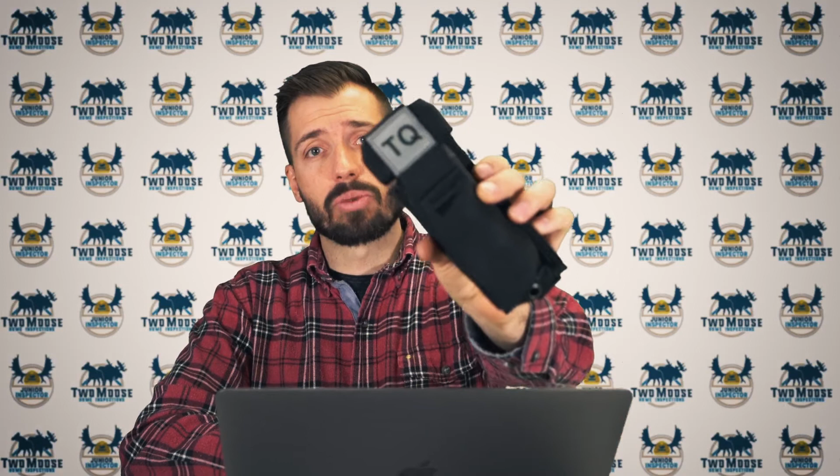Each one of our guys has the ability where on the back of their belt, we have a tourniquet, just like this one right here. This tourniquet is inside of a pouch. You flip this up, and now you're brought over to the actual tourniquet. You can pull that out. Here's a tourniquet that's currently out, and you really want to be careful because there are a lot of knockoffs. Whenever it comes to a tourniquet, you might say, hey, I want to save a couple bucks and not spend $30 per tourniquet, I'm going to spend $10 per tourniquet—make sure you find the right thing.

But basically, if we have an issue, right here we have our tourniquets. They can pull out the tourniquet like this, place it onto their arm. You grab this red tab right here and cinch it down just like that. Once it's cinched down, you might want to do the high and tight approach—a couple inches above where you have the issue. You take this right here, the windlass, and start tightening it up until it cuts off the blood flow, until you don't have a distal pulse or whatever it may be. Take the rest of this on your arm, put it in between these two things. You might have to go around twice—in this case, twice will work.

And then we're going to pull this over. In my pocket, and my other inspectors, we always have ourselves a Sharpie, so I can write the time on here if I'm conscious enough to do so. But that's why the first thing we do is contact 911.

So basically with a tourniquet, that was just in general terms, how to apply a tourniquet to your arm. I need to take this off, and that was only one twist. So that is how you would apply a tourniquet to your arm if you were self-rescuing, if, let's say, as you fell through the attic, you were cutting your arm. So that is one part of the safety, which would be the tourniquet.

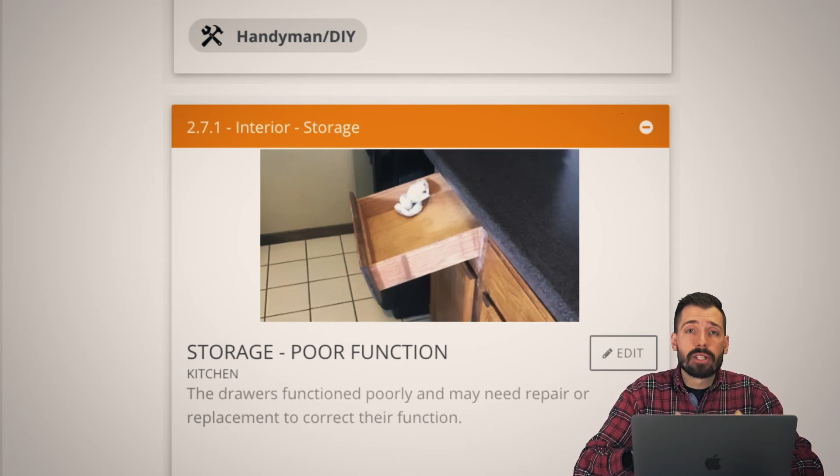Inside of this, there was some moisture on the ceiling, and what it was were moisture stains. But there was no added moisture, nothing in the thermal. The moisture meter didn't detect anything. That's that thing that you can see. It's stabbed into the ceiling.

It uses two prongs, and then it basically figures out the relative moisture between those two prongs. There is some electrical connectivity between a wet surface, so then what that does is it kind of figures out how moist that particular surface is. And in this one, it was bone dry.

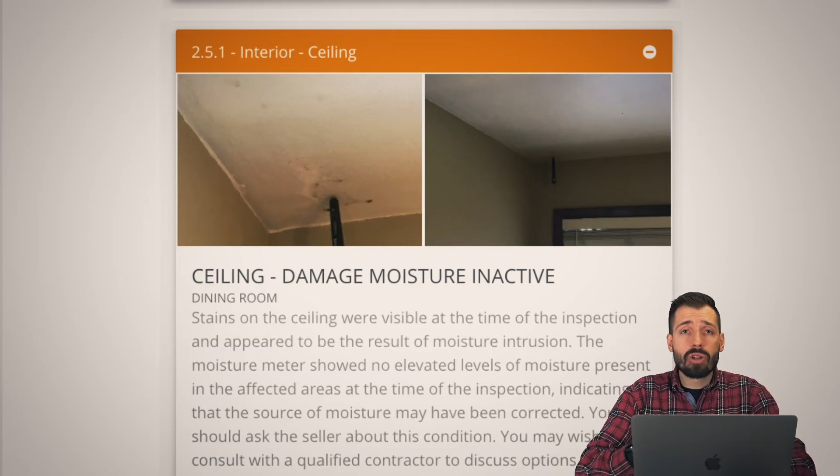So then my recommendation, what you can see at the bottom here, is just to inquire with the seller. Ask the seller, hey, what happened? Why is this way? It could just be as easy as, oh, it was a repair that was fixed a while ago. They put on a new roof. It was an upstairs condo, and so they had a leak. They repaired the leak, no issue.

Okay, well, I still probably have to re-drywall the area, re-texture the area, and repaint the area. So it's still going to cost you some money, and that's why it would be an orange issue as opposed to a blue issue.

So then moving on, it's really easy to put labels on your circuits. And the benefit to this is, if you trip a circuit, you know exactly what you tripped. If you need to turn something off to do an electrical upgrade, or if an electrician comes by to do it, then boom, there they are.

You're paying for these electricians by the hour. If you're paying $150, $200 an hour for a master electrician, and they come in and see 20 of these things, and don't know exactly which circuit to turn off, they have to go around just guessing which circuit, and that takes time. You could lose 20 minutes, half an hour.

Let's just say you're losing $100 just because you didn't label these circuits. And you can do that at home.

Turn on all your lights, turn on all your devices, and one by one, switch off each one of these circuits. Then you can just write the name: north bedroom, south bedroom, living room. Makes it super duper easy.

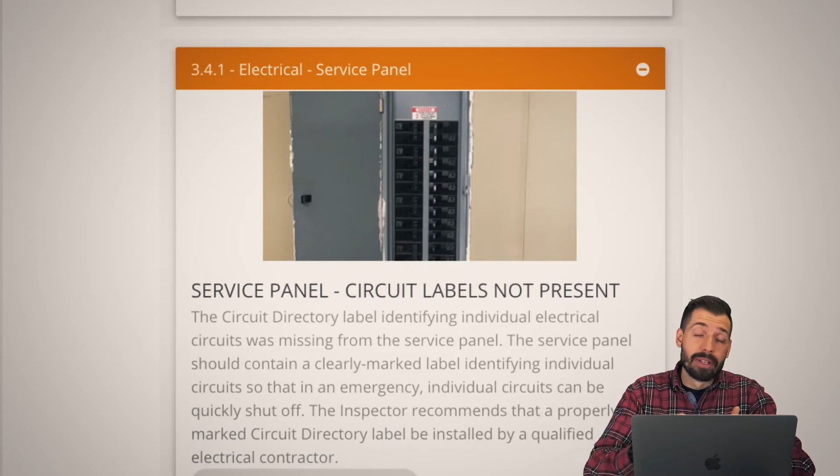All right, this particular shower, definitely end of life. There was so much moisture behind these tiles that they were peeling off of the wall. So these shower tiles were just done. And right around the door was really the worst.

But what it was, was a steam shower. And because of that, the steam had gone through into the back. I don't believe that they had proper waterproofing or anything along those lines. And that has then caused rot or decay behind.

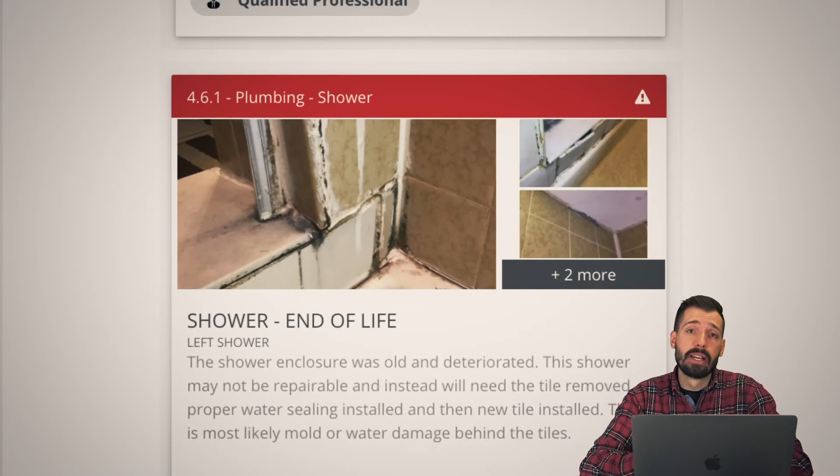I guarantee you the mold issue is more than likely robust. And now those tiles are falling off. Because those tiles are falling off, it's just due for a replacement. It is time for something new.

And so this is the InSinkErator disposal. Obviously blades that spin around really fast, designed to break up a whole bunch of stuff that's in there. Well, if your hand goes down into that, that's going to be a bad time. These baffles prevent splashing, and they also prevent people from putting objects in there that they shouldn't put in there.

So ideally, what I'd love to see is that this baffle just be reinstalled. That way we have a brand new, good to go, super safe sink that doesn't splash anybody, keeps the noise down, and also doesn't let anybody get hurt.

So, rubber supply lines. What happens with rubber supply lines is that where they crimp that end onto the end of the rubber line, a lot of times it might be over or under crimped, or as you move the pipe, we might get a little bit of fraying to that rubber.

Rubber supply lines are always under pressure, which means any leak can become catastrophic. So anytime you see rubber supply lines, right next to it you can see one of the lines is rubber and one is braided stainless steel. So why did they put a braided stainless steel there? Well, probably because the rubber failed.

So just replace both. It's a $20 investment and it takes no time at all. If you have an index finger and a thumb, you can tighten that right on there. It's as simple as putting on a garden hose. I would highly recommend that if you look behind your laundry machine and see that it's not braided stainless steel, just get it replaced. You can probably do it yourself if it's easily accessible.

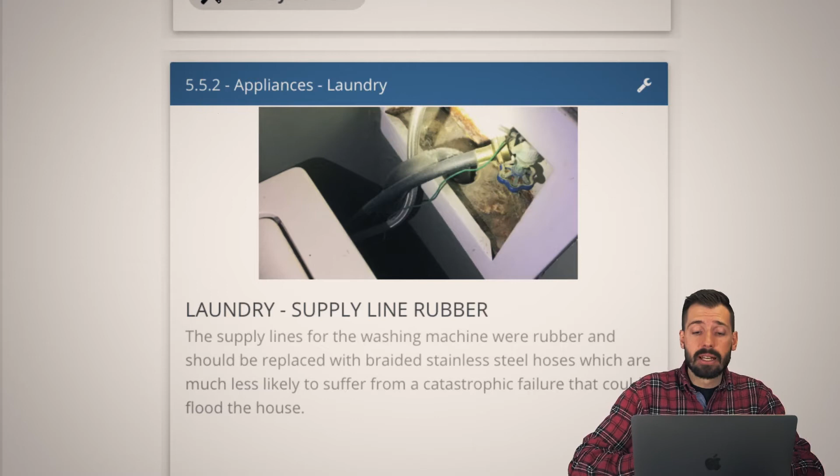If you've ever kicked down a door before, you basically have to kick it in the direction that it swings. That's the weakest part of the door. If you have to go in the opposite direction, you're battling so much support created by the door and the hinges. You'd literally have to break off all the hinges, break off everything around the jamb, and push that door all the way out. You are not getting out of that door.

So in case of a fire, you need to make sure that on the inside, no matter what, you can always unlock that door. If you cannot unlock that door, you're going to have a bad time. And by bad time, I mean death. So this is a $15 fix. Just get it done. It's only $15, but this issue right here could kill you.

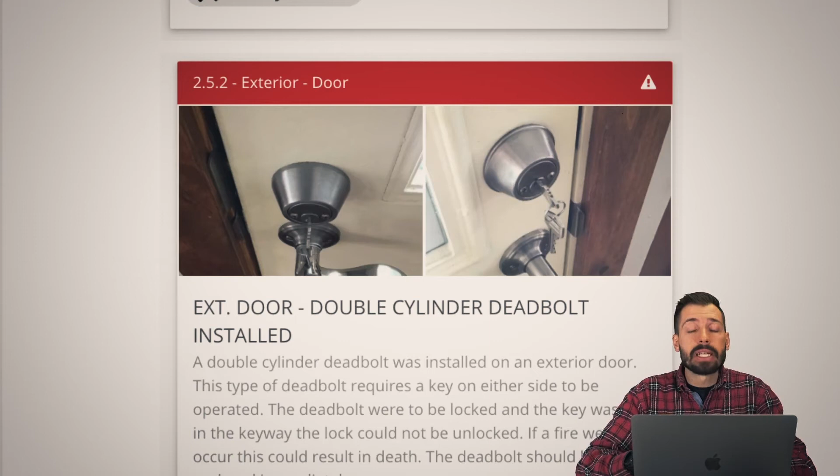So please make sure that inside of a house, you always have a way to get out, and it doesn't require a key to get out.

All right, this particular house, very interesting. So they had a wall and a roof coming to the wall. Normally there's a thing called a cricket, and basically just think of that as a diverter that will divert the water to either side. If that water gets diverted to either side, then we have no issues.

Now this particular house, the thermal imaging just shows that the snow is up against the wall. So we have some really, really cold spots on the wall, but the moisture meter did not find any elevated levels of moisture. So they probably did a great job of waterproofing everything because they knew this would be an issue, so it wouldn't become one.

But still, the recommendation is to install what's referred to as a cricket. It basically takes that slope and tells it to go this way and not touch the wall. That's what we want to see, a cricket like that.

So here are the photos of this particular house. You can really see in that center photo how cold that snow is that's resting right up against that wall. And in the photo to the left, you can see that snow is touching the wall. We just don't want that snow touching the wall. We want it to go somewhere else, because whenever it melts, it's not just going to be snow, it's going to be water.

And if it melts inconsistently, because you can see the cold temperature inside the house, that means it's going to melt, then the cold is going to freeze it, and then it's going to melt again. We're basically making an ice dam up against that wall, and because of that ice dam, now water can come up and underneath the siding and into the house, and we just want to avoid that.

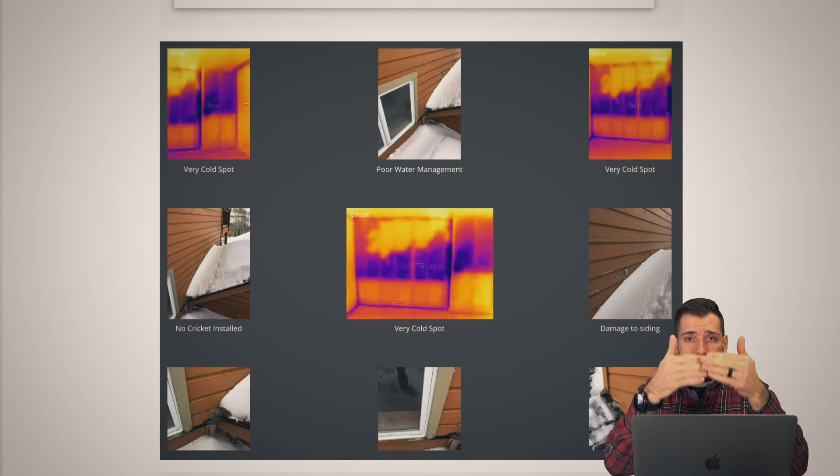So installing a cricket is not a big deal. Any carpenter or roofer could install a cricket that basically takes the water and pushes it to the side instead of letting it hit the wall. So, interior ceiling.

So on this house, I was up inside of that attic, crawl space, whatever, and it was basically just batt insulation. If you're unfamiliar of what batt insulation is, it's basically just insulation, normally fiberglass, that looks like a folded blanket. It might be 16 inches wide by 4 feet long, nice and thick and puffy. Don't roll in it because fiberglass is really itchy.

But it goes into these voids, right into that cavity or that space. And here what you can see, which is what I saw whenever I was in the attic, is that they're just kind of falling out of the voids. They just need to be resecured where they need to be. So what we can see is the cold air from the attic is taking the heat away from the living space, and we don't want that to happen because that reduces energy efficiency.

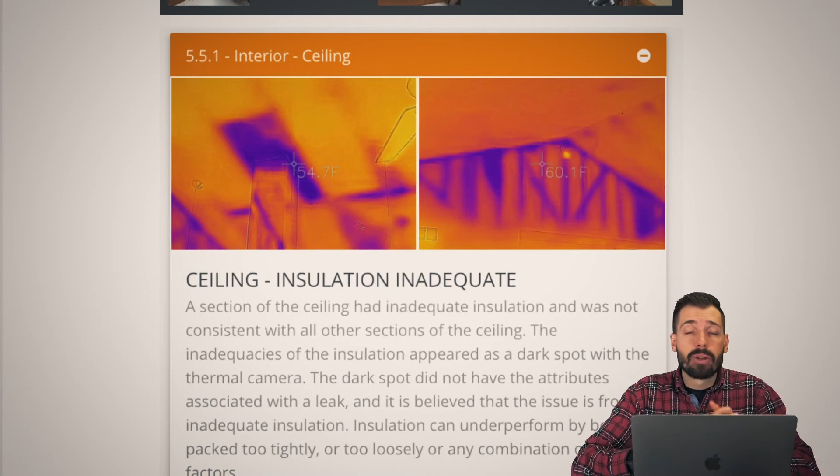So what are we talking here? I don't know, maybe like $50 worth of insulation, and then we can make sure that we are not losing energy efficiency with our heating bill because the heat is not escaping. So really, really easy fix, super accessible attic, super maneuverable attic. We just need to make sure that insulation is put right back where it needs to go.

All right, so in this attic, interesting thing is that we have a sewage vent pipe, and that sewage vent pipe was coming up and it was no longer connected at the top. So now all that sewer gas is going into your attic, and that's less than ideal because one, sewer gases could be flammable, super unlikely, but it could be flammable. And number two, it just smells really, really bad.

And you can see that they had a mechanical union where basically they just put the two different pipes together. So it was a PVC pipe and an ABS pipe, and they just need to tighten it down. So really they just need to loosen up that clamp, put it back in place and tighten it down.

Super easy fix. And then if we take a look at these pictures here, we can see that there were some pipes that were not in use. So in that upper right-hand corner, we have a pipe that's no longer in use. Since it's no longer in use, that means that whenever it rains, instead of the water going down the pipe and then over to the sewer, it's going down the pipe and into the attic. So we just want to put a cap on top of that.

And then on the bottom left-hand side, you can see that there's an orange circle and there's a green circle. The green circle is saying that we are above that 6 inches, so that way if there's snow and other things like that, that vent pipe, that vent stack, can still work just the way it's supposed to.

The other one, a little bit too short. I don't think it's doing what it needs to be doing. I was unable because of the snow to get up there to measure it, but I'm pretty sure it's less than 6 inches. And even if it isn't, with the amount of snow that they get in that area, we definitely want it to be higher than it is. I believe that the one that is super low is the one that needs to be adjusted. So it's real easy - push it up a little bit higher, put an extra 12 inches, mechanical union, and we're done. It's fixed. It's that simple.

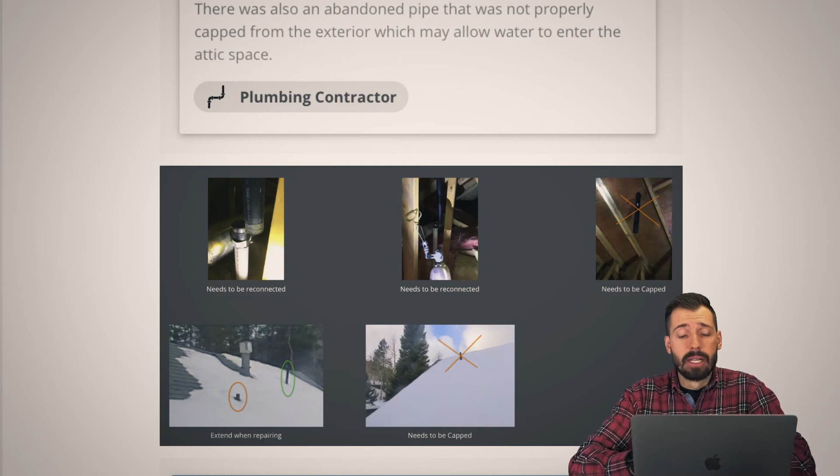So anyway, just something to be aware of, that if you're in your attic, make sure the pipes have a place that they're going. Every pipe should get to the exterior.

So this house here, this was actually the same house with the lack of a cricket. And what you can see is that because of that, we got water that was coming down into the garage. And because it was coming down into the garage, you can see that white stuff, which is efflorescence, which is basically the water comes through the wall, and whenever it evaporates and dries, it leaves just a little bit of mineral deposits right there.

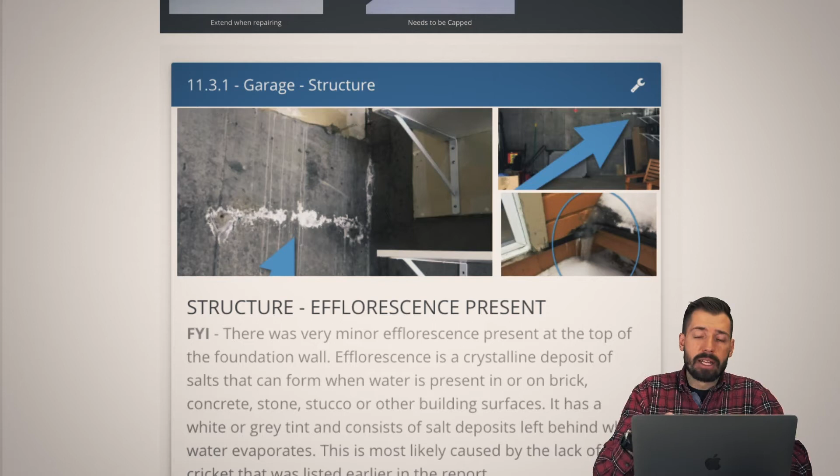And so this was not severe. This was not a big deal. Really, I didn't see any issues with cracking, I didn't see any issues with anything. And if they fix that cricket, then that will also fix that type of an issue, because we also need to do just water movement, drainage, whatever. But I think all the water was kind of going there, so during spring runoff, that makes it a little bit more difficult.

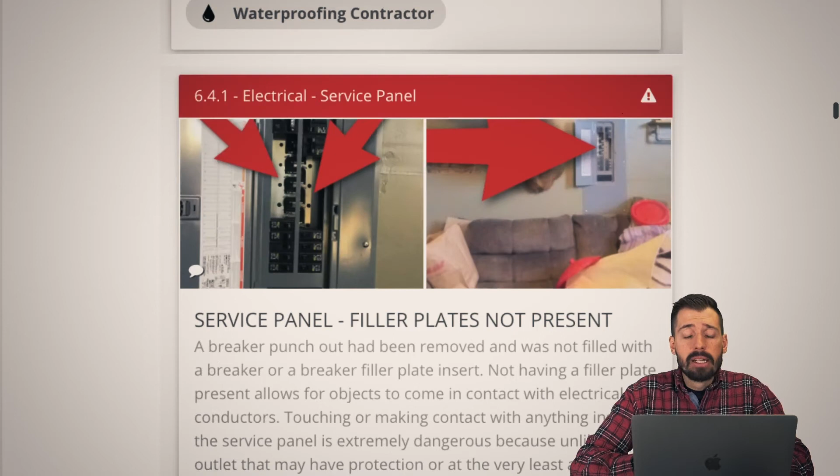But no, it's super minor, just something to be aware of, but really not a big deal. All right, so this is a good way to kill people. Let's just talk about it.

So the filler plates are not present. What does that mean? Inside of there, they punched out every single hole, but they didn't fill it with a circuit breaker for every single hole that was there. So we put in these filler plates to basically prevent somebody from putting their hand into the circuit panel and being electrocuted. Now, both of these, if you look where the two arrows are pointing down, those arrows are pointing to pieces of metal, and one side is 120 volts, the other side is 120 volts.

And because of the service panel being attached to a 200 amp breaker, that's 200 amps. If you have 0.7 amps going across your heart, that's enough to kill you. So 200 amps, I don't know how many times you can die - I think only once, but this thing will kill you. And the scary thing is that it was right next to a couch and the panel was left open, no lock on it, no nothing.

And so if a kid were on the couch and they put their hand in there, it would be game over. And so we just really want to make sure - how much are you going to invest? Each filler plate's like $1.50, right? And we need to probably fill up 10 of those. So for $10, you can save a life. That is a good return on investment. So just something to be mindful of.

Also, same place, all the receptacles, all the switches, they all did not have a cover plate. Each cover plate, even for this, what's referred to as a 4-gang box because there are 4 switches in it - that right there might be a $2 cover. Every other cover, anywhere from 50 cents to $1.25. But if you put that cover on, and anybody can put that cover on, for this particular switch it's less than $2, and it's probably less than 2 minutes of your time.

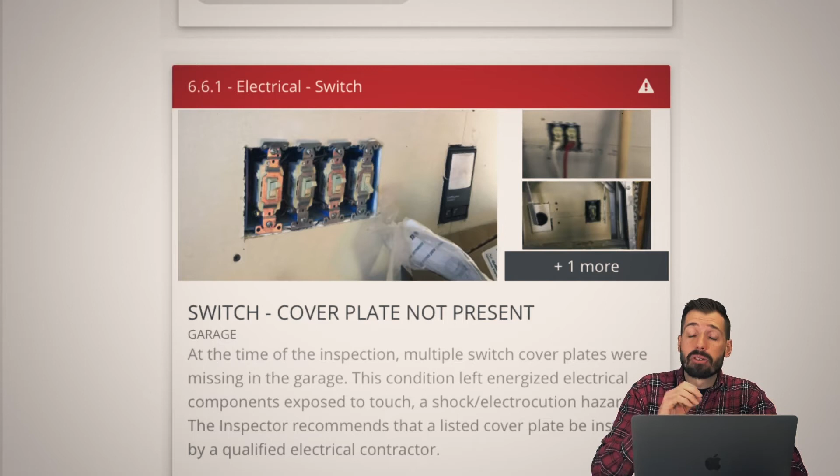Because if somebody in the dark touches that switch but they actually touch on the side and they touch one of those metallic things, you're going to get shocked. Hopefully the hand moves away and you don't die, but you're still going to get shocked and it's going to hurt like a son of a gun. So something to be mindful of.

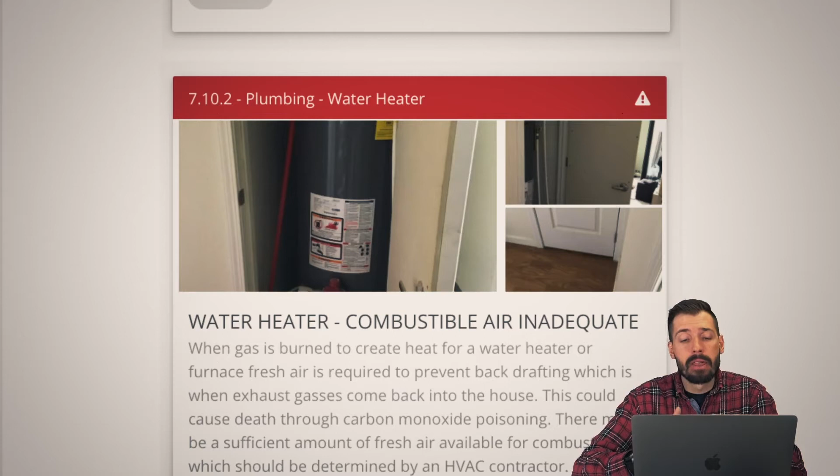All right, in this house, the combustible air was inadequate. So basically what happened is, I believe, and I don't know this for sure, but I believe that originally the water heater was an electric water heater, and I think it got changed over to a gas water heater. So whenever you have a gas water heater, you need to have air coming in.

Now what I will show you here is this is referred to as the fire triangle. So you have your fire triangle - heat, oxygen, and fuel. In order for there to be a fire, there has to be heat, that's going to be the igniter sparking. There has to be fuel, that's going to be the natural gas. And there has to be oxygen.

So in a room like this, where it's completely shut, completely closed, and there can be no air coming in or out, where's that oxygen going to come from? Because we're already going to have this combustion, now we need oxygen - it's going to suck that oxygen from somewhere. And it's very, very possible that it might suck the oxygen from the flue, from the roof all the way down the flue, and it might suck in that oxygen as combustible air.

And if it does that, okay, fine. But then where does the byproduct go? Where is the carbon monoxide, which is a deadly, deadly, odorless gas? And there weren't any carbon monoxide detectors anywhere near this, so there's really no idea if we're safe or not. Now whenever we do an inspection, we always have a carbon monoxide detector on our person that is actively checking to 1 part per million accuracy of how much carbon monoxide there is in a home.

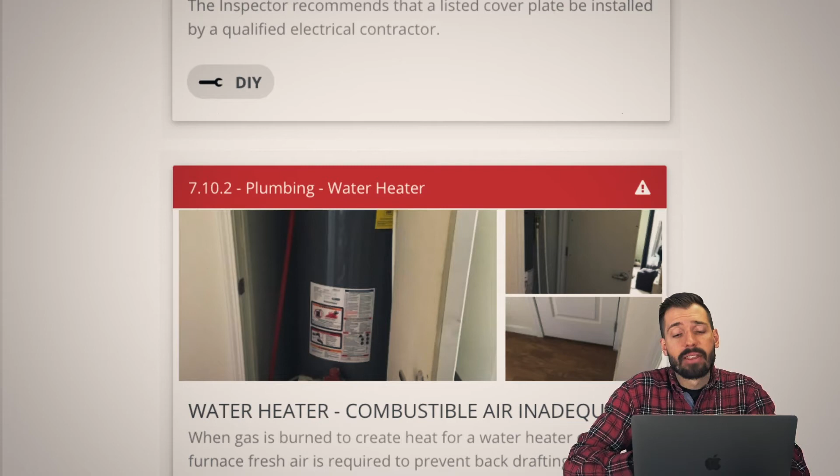And this home, thankfully, had zero. But if conditions were correct, is it possible that oxygen could come down that flue pipe and all that carbon monoxide gas is going to go into the house? That is referred to as a backdraft. That is very dangerous.

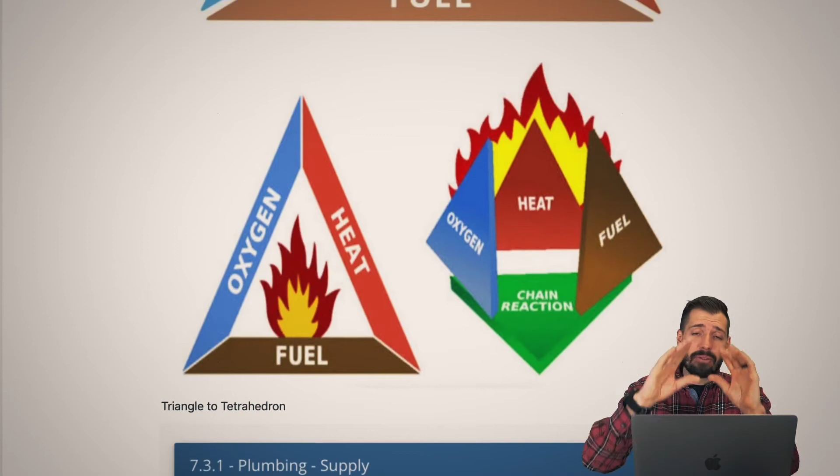Now, whenever I talk about the fire triangle, I also have to talk about the tetrahedron. So basically now, instead of a fire triangle, and I can't do it as easily, but now there's a fire tetrahedron.

So basically this here is a 3D object as opposed to a 2D object. I like to just jokingly call it the fire polygon.

But honestly, what this is talking about is a chain reaction. So the chain reaction sometimes starts and doesn't stop. A candle will continue to burn its fuel source until there is no longer a fuel source available, and then the candle will expire. But then there are other things where the chain reaction is not strong enough to continue, and you have to constantly be reapplying additional input to make it stay lit. That might be if you're starting a fire, and you apply the heat, but you didn't apply enough heat, and you have to continue because you have wet wood, and the wetness of the wood is stopping that chain reaction. That right there is the explanation of the chain reaction.

And sometimes that chain reaction can be a chemical chain reaction, which means that if you have oil-based rags that you've thrown into a container, there can be a chemical reaction that creates that heat, creates everything, and that gives it enough that it can then ignite and you can have a fire. So anyway, since we're going to talk about the fire triangle, I guess I may as well, for once and only time, talk about the fire tetrahedron and explain to you why that is something that exists.

Here's something that I just don't understand. Why in the high Rockies, in a high alpine environment, do we have vented crawl spaces? Yes, vented crawl spaces allow us to have lower levels of radon. That's amazing. However, vented crawl spaces venting 9 months of winter into the basement of your house, whenever you have inadequate insulation and fully exposed water lines, means it's a recipe for disaster. If you have an unconditioned crawl space and you're putting in freezing cold exterior air, your pipes are going to freeze. I do not like vents in a high alpine environment.

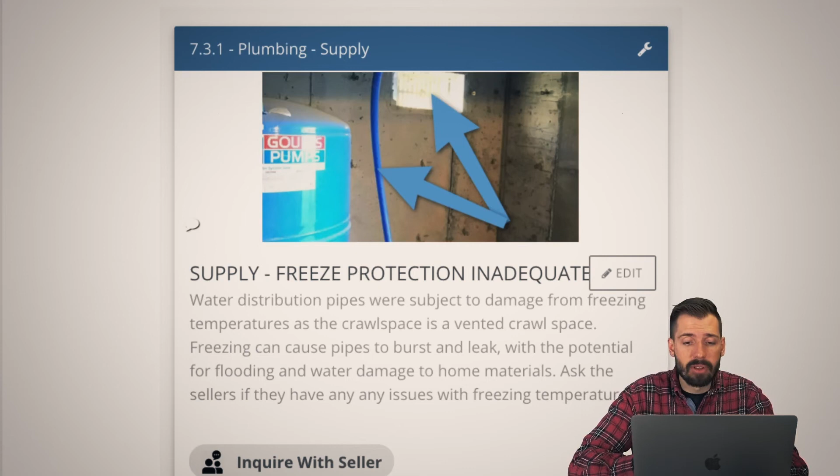All right, this is just me being nitpicky. So you have a round object that has a gap behind it, and the water is going to go down, and then it's going to go back behind your wall, and it's going to cause rot, mold, and other things like that. Take caulking and just go all the way around. Now, you aren't going to do a full circle—you're only going to go around a portion of it, down to this side, and that's it. The reason we leave the bottom open is that if water does get in there, we want the water to be able to exit somehow. We don't want to trap it back there, but we also don't want to give it a free pass to go in behind the wall.

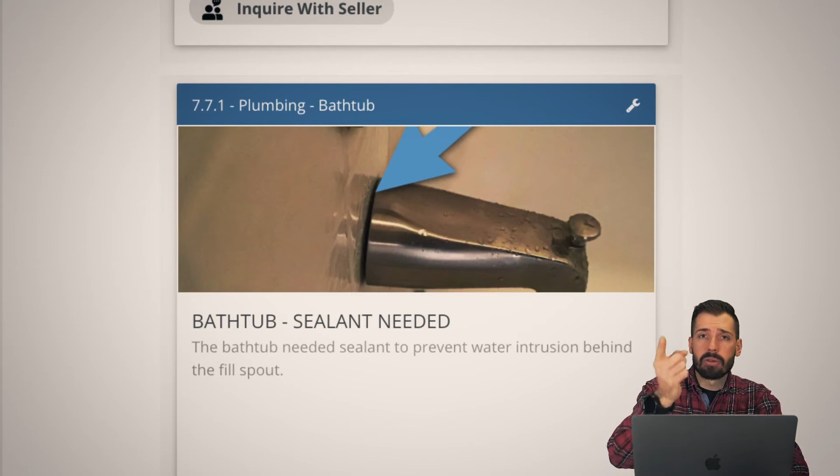So just a little bit of caulking, $1.50 for a little tube. You don't have to have a caulk gun. They have these small tubes that look like toothpaste tubes, and you can just put that on with your finger, wipe your finger off, or if you have a glove, do that. Or if you have a proper applicator, you can do that. Easy peasy.

All right, this one is a trigger for me. We all talk about some of our triggers—this is a trigger. So we have just exhausted all of this radon gas. We've done an amazing job of exhausting all of this radon gas. It is going out of our house, and we're pushing it directly into the soffit vents.

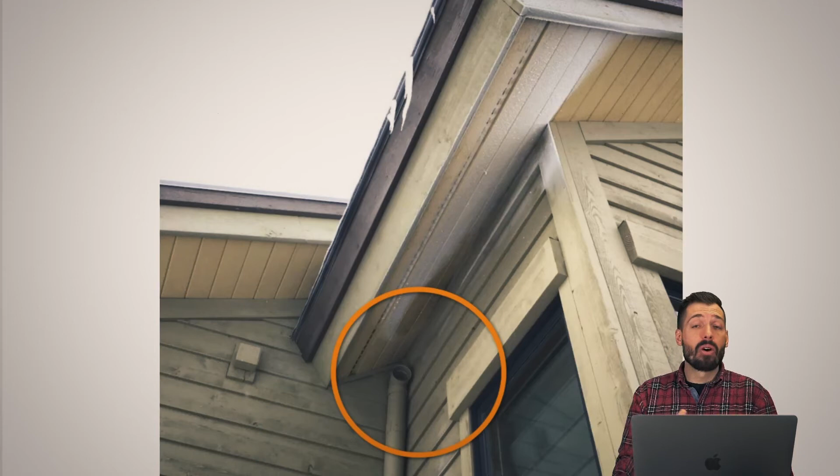The soffit vents are the vents that bring air into the attic. Most houses have some kind of air movement between the attic space and the living space, so we're now introducing highly concentrated levels of radon, which is radioactive gas, into your attic space.

What are you doing? Take that pipe up, over, and out and get it away from that window. Get it away from that soffit vent. Just get the radon up, out, and away. There is no reason to reintroduce it into the house.

This is probably one of the best examples because you can see the frost buildup showing the temperature difference, and you can see the humidity being brought up out of the ground by this radon mitigation system. There's no clearer way to show how much radon is going directly into those soffit vents. This is a perfect picture to explain that.

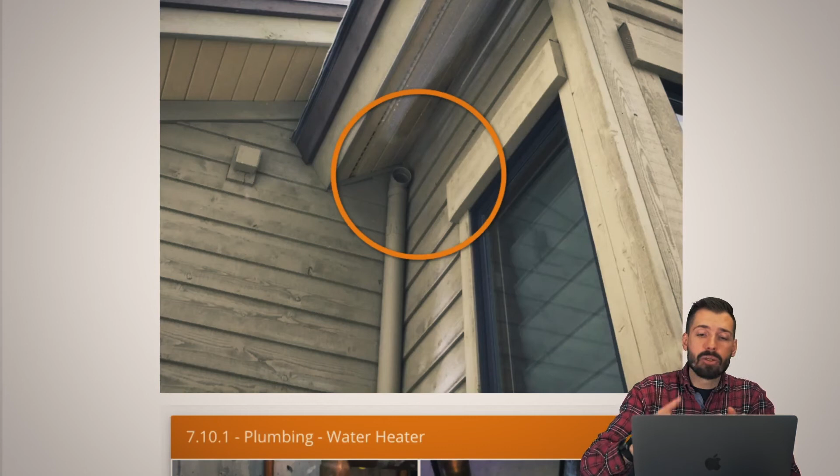So anyway, just $20, and paint it to make it look nice. You can do those things. Just get the radon out. That's all I have to say about that.

All right, water and corrosion. The water heater had some corrosion on it. If it has corrosion, you definitely want to get that fixed. If we have a leak, keep in mind that whenever you're connected to a water supply, that supply is limitless. It will continue giving you water until forever, meaning it'll continue to flood your house until forever.

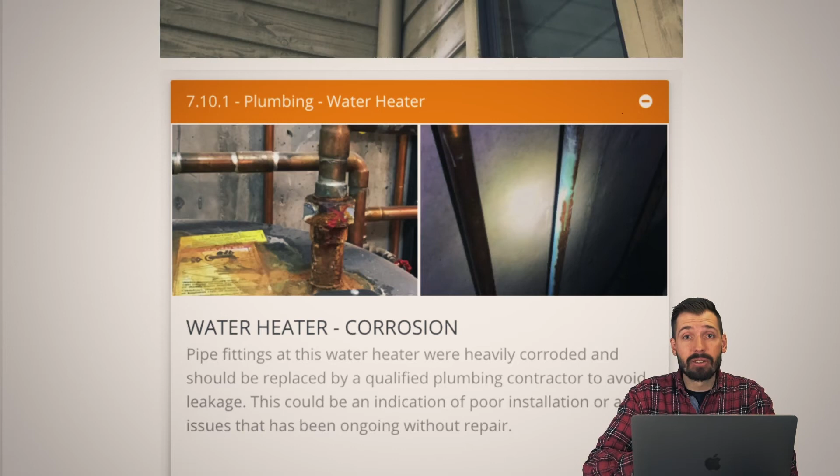So you want to make sure that your water heater is definitely not full of corrosion, not full of rust, and that all your pipes are good, because if not, you're going to run into an issue, which I think we're going to see a little bit later.

All right, this one here. If you have kids, or know kids, and you also happen to have a garage door, this is your responsibility. Go grab a 2x4, put it underneath the door, and close the garage door. If the garage door does not hit it and then come right back up, that means you have a problem. This particular door was a custom, super duper heavy wooden door.

This door by itself, even with the springs helping bring it back up, is like a 500-pound door. Now imagine a small child having 500 pounds across their chest. Even with these springs reducing that weight a little, we might only be talking 100 pounds. Take a 6-year-old, put 100 pounds on their chest, and you know what happens.

It is your responsibility as a homeowner to reduce your liability and make sure people are safe, to make sure things are good. Do you know what the fix to this is? Do you know how serious of an issue this is? This is a red issue. This is a big deal. It's a deal breaker. No.

What it is, is a knob that you twist. You literally just twist this knob. It's inside where you change the light, and it is the tension for bringing the door back down. You just turn it to go lighter, like you don't want as much pressure, then put that 2x4 underneath there, and if it hits it and bounces right back up and the door fully retracts to where it was, then you're golden. You're perfect. All it took was popping up that cover and giving a little twist, maybe a quarter of a twist. If you can twist a knob a quarter of the way, this is the resolution.

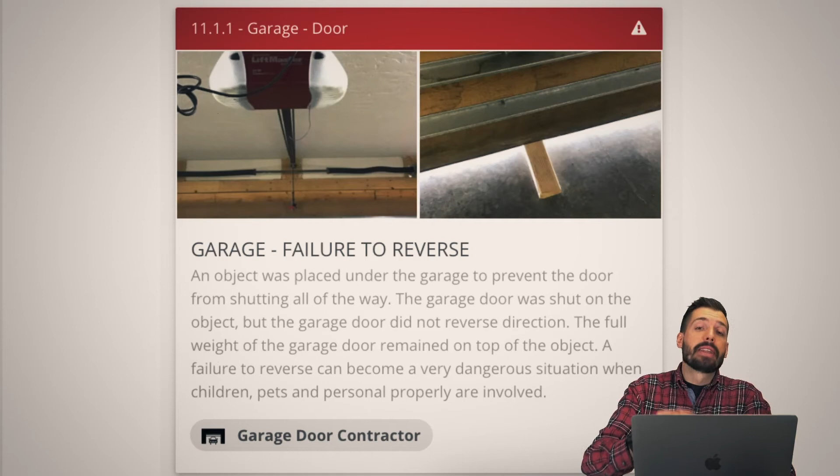It's so silly because there are so many issues in a house that could potentially kill somebody that honestly take less than 20 seconds worth of effort to make completely safe. So that's my soapbox, getting off of it. I hope that's the only soapbox for today, but we'll see.

In this house, there was a radiant zone where, in that bottom right-hand picture, you can see that half of the floor is dark blue and purple and the other half is yellow. I can't tell if that radiant zone was that way per manufacturing, like they decided they don't need to heat this part of the floor because the rest of the house will keep it warm, or if there was a failure and a pipe was closed. It didn't look like a pipe was closed when I looked at the system. Everything looked open and operating correctly, so it looked to me like this was probably the way it was designed.

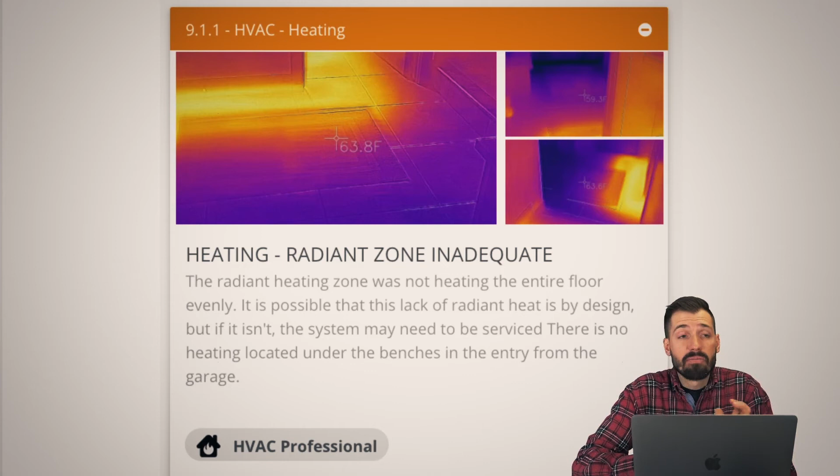Is it the best design? No, not necessarily. Is it wrong? No, not necessarily. But it's one of those things our thermal camera can pick up, and then you can just have an HVAC guy come take a look at it. You can inquire with the seller if they're the original builder of the house and have been there the entire life - hey, what's going on here?

So next thing, exterior walls. On these houses, whenever you have two pieces of siding that come together, there's normally a piece of flashing right there on that seam because we don't want rain coming into that seam. We actually want rain to hit and then come down away from everything.

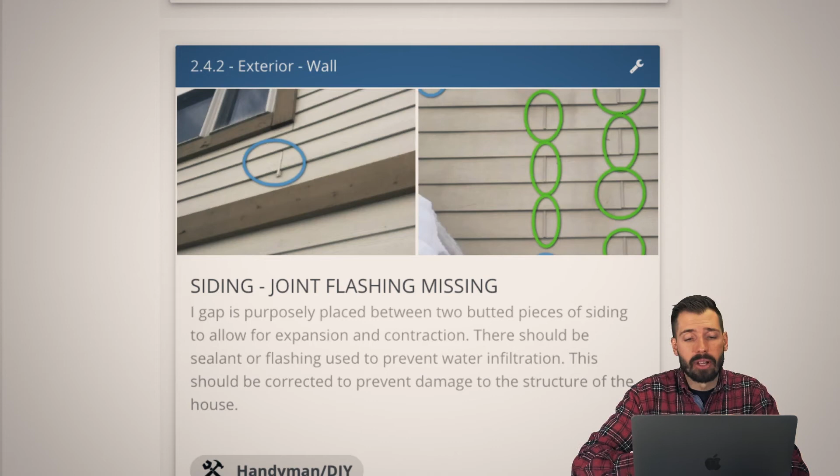And so they put these little spacers in there. On this house, some of the spacers were missing - you can see the picture with the green, all of these spacers are there, and then there's a couple in the blue circles that aren't there. You can just get these spacers for super cheap, slide them up onto there. If you want to put a little bit of caulking just on the edge, or glue or adhesive, they won't fall out. It'll be perfect. Super easy fix if you're worried about it. If you're not worried about it, don't worry about it.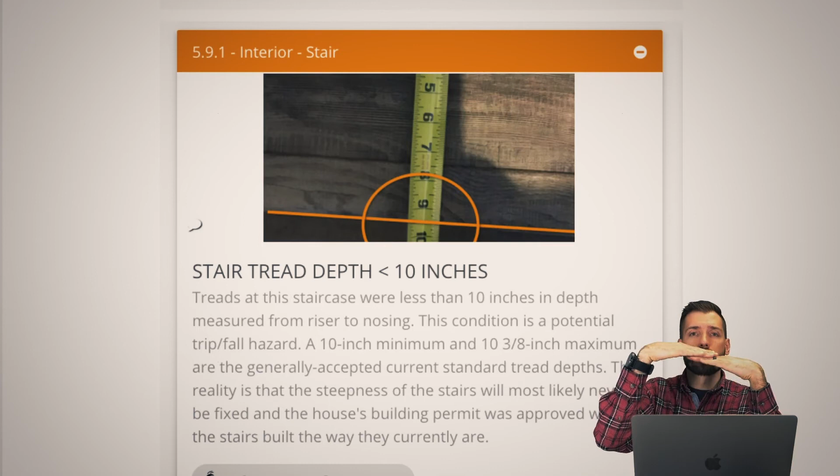So next thing, stair tread depth needs to be no less than 10 inches. This was at 9.5. So what happens here is that what you're stepping on is actually shorter. Whenever you're coming down the stairs, there's the likelihood that your heel could potentially, because you're used to other stairs, not be quite level. Your foot will then fall into a little bit of plantar flexion - the foot will just go like this, and then you will start to slide down the stairs.

So is there a fix to this? No. Nobody is going to completely demolish that stair set and put it in the correct way. This is just one of those things that just is. I think even in the last one we talked about stairs, how sometimes they just are, and there's not much that can be done about it.

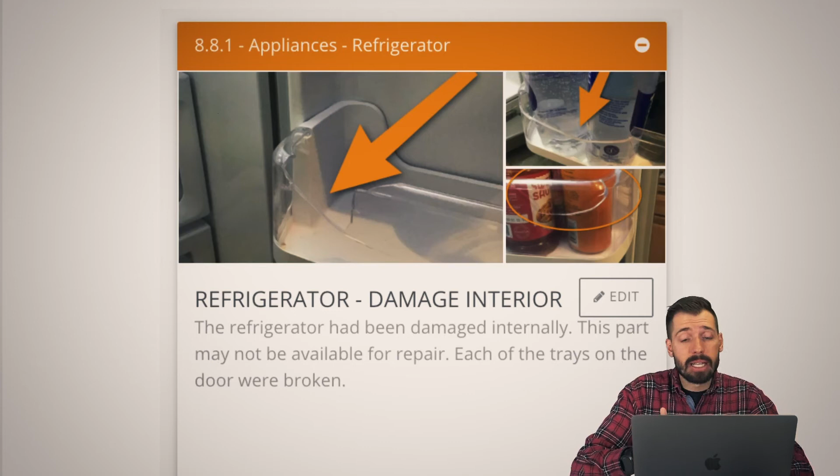All right, so in this refrigerator, I think every single door accessory tray on the door was cracked, broken, or damaged in some way. This is reported upon because it's going to cost you some money and it might take time, and who knows if the manufacturer still has those replacement parts. Just one of those things to be mindful of.

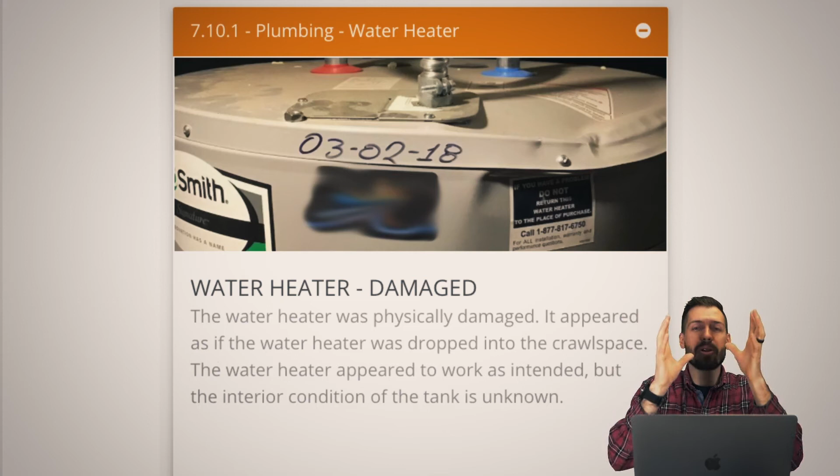Now I'm off the screen - if I have my hands all the way up here, and I'm going to take a 200-pound water heater and gently and slowly bring it right down to here... you're joking yourself, it's never going to happen. They had not enough guys to do the job that needed done. Maybe there was only one guy doing it instead of two, but there really should have been 3, maybe even 4 to get this thing down there safely, or have some type of pulley system to get it down the right way.

Long story short, it appears as if they dropped it. And not only did they drop it, but instead of getting a brand new one, since they're the ones that damaged it, they just installed it anyway - nah, it'll buff out, right? So, whenever I see things like this, I would personally contact the person that installed it and get them to put in a new one. Is anything damaged? There's no way to know. Well, it's not leaking - yeah, not leaking now, but maybe it's going to leak in a year because we have damaged that sidewall, we've bent it. Maybe this is now a place for corrosion.

Did we dislodge the sacrificial rod that's inside of it? Are we now going to have more rust and other issues like that? The thing is, we don't know the condition of it because it was dropped. It needs to be replaced. Long story short, that's what needs to happen. And it needs to be replaced by the people that dropped it, not even necessarily by the homeowner. It needs to be replaced by the people that installed it. It's just silly.

I do have another trigger, it turns out. If you want to talk about triggers, here's a trigger. I came back and they specifically stated, we fixed this repair, repairs were fixed. So I came back, I put my moisture meter in the exact same two holes that I had it in before. Boom, still moisture. All right, well, whatever. So then I take my thermal camera and I can see clearly still a dark spot in the wall, still evaporating moisture. We call up the plumber.

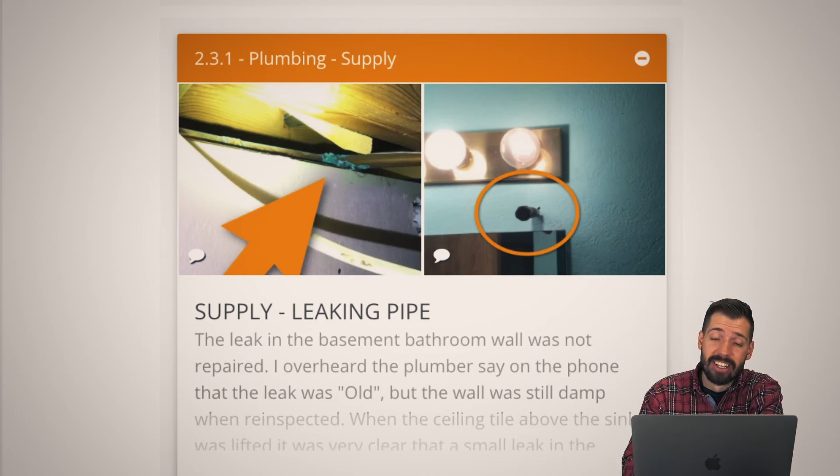All right, hold on. Good morning. All right.

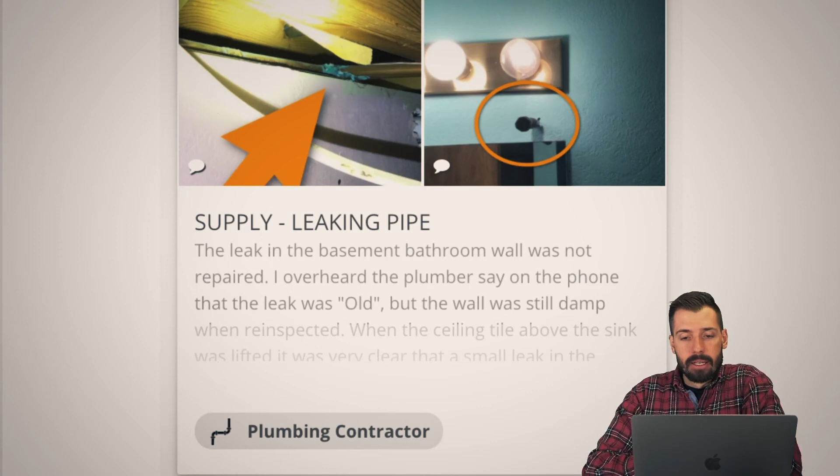Now, there are things in this house, such as a crack going across the ceiling. There were things in the house, such as doors that wouldn't latch or wouldn't open or close properly, which tells me, yeah, there was definitely some sort of settlement. But then you go into the crawl space, and there have been repairs. And if you take a look at these repairs right here, it was substantial. I think what happened was that we had water coming into that crawl space, saturating the soil, and the house was either sinking or the foundation wall was moving.

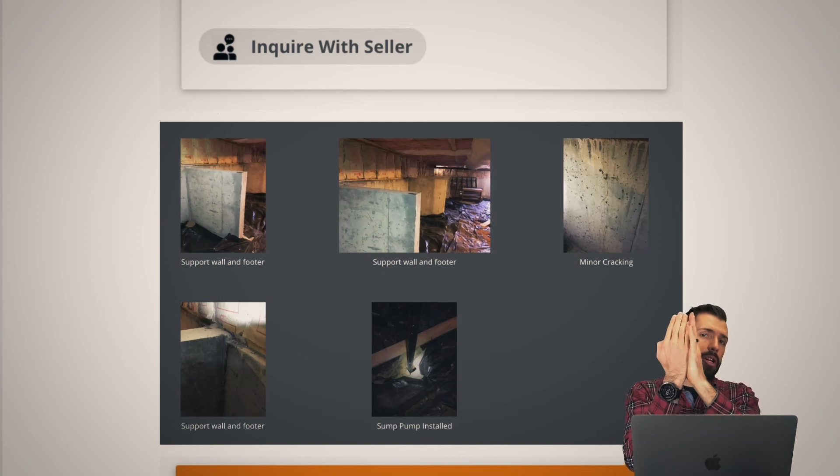So they put in these large walls to basically stop that movement. These walls are now holding it back. The walls are also on a little bit more of a footer, so maybe we were sinking and so we've dispersed the weight a little bit more. I don't 100% know. And then they installed sump pumps, two of them, to suck water out of the ground and eject it elsewhere.

With all of that being said, I definitely have my concerns because they did not want to disclose the structural engineer's report. They did not want to disclose who did the work. They did not want to disclose any of that kind of stuff. And so to me, that is a red flag, because anybody can pour concrete and some people can make it look good. But what I want to know is who gave it the final blessing? Who said this is great?

Because what I would love to have seen is that foundation wall supported. I would love to have seen, which you would not know, but I would love to have had them jack up that side of the house, maybe a quarter of an inch, maybe half an inch, and then redo that pony wall - basically, we'll just call it that cripple, that support, whatever you want to call it.

And then the doors would open and close properly. Things would do what they're supposed to do. The doors did not open and close properly.

And the fact that they didn't want to give us any kind of information about the repair, that's just a red flag. I don't like red flags. Not a big fan. Red, white, and blue, love it. Red flags by themselves, not a fan.

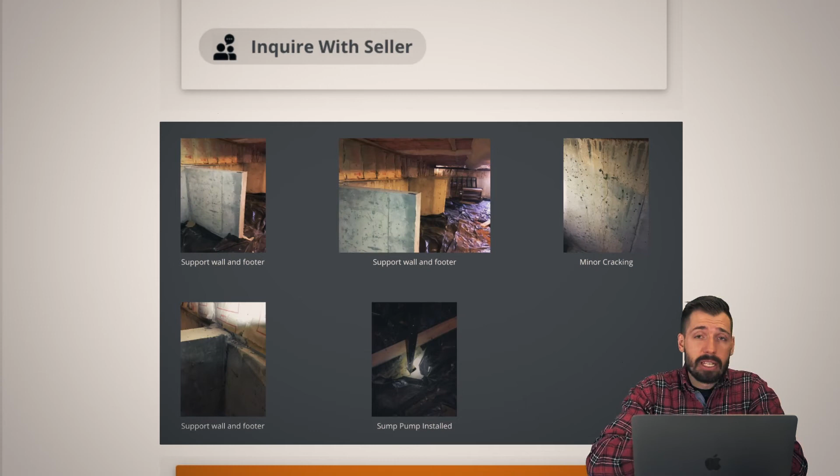Now, depending, there's a lot of rules and regulations about when you can bond the neutral and the ground together, which is going to be at the very first service disconnect. But let me just tell you, at this particular house, we had a meter base panel. Then we had an exterior panel. Then we had a garage panel, and we had an inside the house panel. There's basically like 4 disconnect points, and now we're bonding neutrals and grounds.

And what you have is that now, because we have crossed the neutral and the ground, 2 things have happened. One is the grounds may no longer be true grounds. They might actually be powered. So whenever you turn off a breaker, there's a possibility that electricity could still be going back to those grounds, or neutrals, or vice versa. And so now that everything's kind of intermingled, I don't really know what's turned off and what's not turned off.

So that's step 1. But the real issue, step number 2, is that because that has happened, now electricity, because I have my 120 volt hot legs, those go back as 240 volts. Now what has happened is that in order to complete the circuit, normally it'd be a red, a black, and a white, and that goes back, and the ground's just there just in case. Well, now the electricity is halfway going back on the ground and halfway going back on the white.

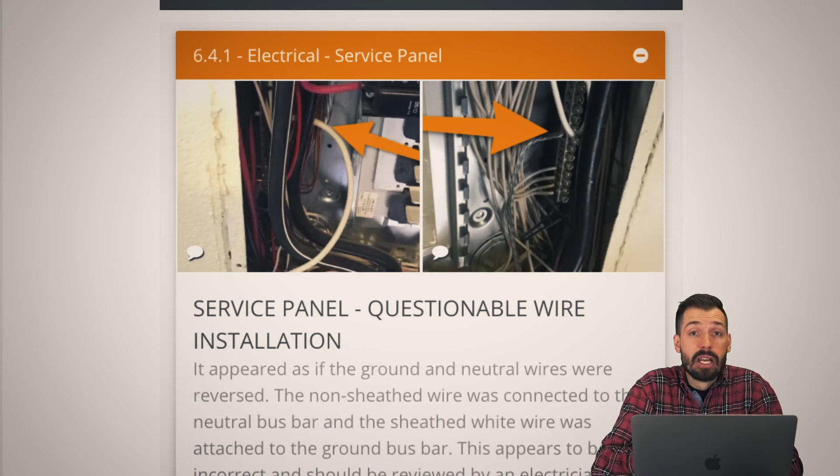And I honestly think that they cut one of the wires too short and they're like, good enough. And they put it back in. Is it good enough? Yeah, it's good enough. But if there is an electrical issue, you're going to have a real bad time.

So talking about electrical things, let's not use extension cords as permanent wiring. So I believe that into this septic system, there's a heater inside the septic system. What's the problem with using an extension cord? Well, one, the extension cord is not rated for continuous use. Two, the extension cord is not rated for continuous exterior use.

The wire is completely unprotected, which means that if grandpa goes by with a lawnmower, not only is his lawnmower going to get electrified, but also that wire is now cut, damaged, whatever. It could be unplugged. There's a GFCI breaker on this outlet, which is safe and good, but there's no way to know that outlet has tripped and now your septic system has frozen. Why do we not just have something with an alarm that will audibly and visibly tell us that the heater is no longer on and operating because the GFCI has tripped?

Why do we not have something in conduit going to exactly where it needs to be? Why do we not have a permanent solution? And why do we need a heater inside of there in the first place? Was this not dug below frost line? These are just questions. All I'm doing is I'm just a guy who asks questions. That's all I do, okay?

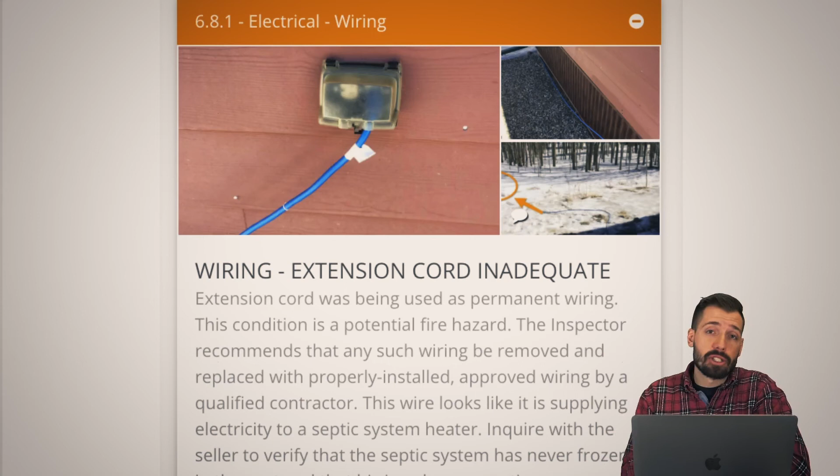So in here, we have old mold growth. It did not appear to be active. But basically, without disclosing this, there was a leak, and I believe it was a burst pipe. This is on an exterior wall, and whenever I walked into the house, every single cabinet door was open for where the water was. And why would that happen?

Well, that would happen because somebody had a bad time, and they decided that what needed to be done was something to basically allow air to get in there to keep those pipes nice and warm. So the pipe froze and burst, and you can tell because this was a manufactured home, and there are valves that you can't really just find at any hardware store. They're kind of specific, but not really. And so somebody put a ball valve on there, and you can see where they spliced out a section, cut it, put in a new section, and put in a ball valve to replace what had already been previously damaged.

So really, all I'm getting at is that if something happened, just disclose it to the people that are buying the house. Number two, clean up your mold appropriately. Number three, don't try to hide things, I guess, is all I'm saying. If there's a pipe that bursts, just say the pipe burst. If you need to keep doors open because you had a pipe burst in the past, tell people I need to keep doors open. Or work on the issues - vented crawl space, insulation, or a whole bunch of other issues that could be going on. We just want all that stuff kind of fixed, but don't lie to people. That's just rude. That's all that is.

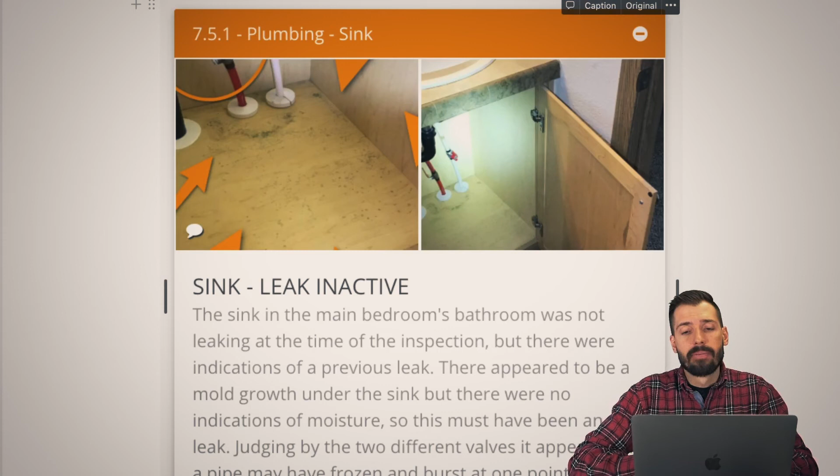All right, so this oven here, the oven of future death, impending doom. So basically it was attached to this cabinet, but the cabinet was not necessarily designed to hold the weight of that oven. And the face of that cabinet is pulling out, and that means that entire oven is going to fall. So there are ways to fix that with just little L brackets. Here's the face, here's the side, put in an L bracket, bolt it, screw it, whatever, we're good to go. So it can be fixed, but you have to remove the entire oven more than likely to get this fixed.

And whenever you opened up the doors, the gap just got bigger, and then you close the door, and the gap got smaller again. This will fall out, without a doubt. It may not be today, it might not be 5 years from now, but this will fall out. And the fact that there's already damage to the cabinet holding it in place, that's going to be bad for somebody on Thanksgiving dinner night.

So up here, this is from a manufactured home, and basically the trusses fold in, right? So all of the support for the roof folds in. They drop one piece with the crane, drop the other piece with the crane, and then they hoist up the roof, and then they put in these legs that fold out to put it into place. There should have been 3 nails on this one side holding this in place. Nobody put the nails in. No big deal, that's why it's a minor repair needed. Here's what you do: you take a pry bar, put it in there, pull back, and put in 3 nails.

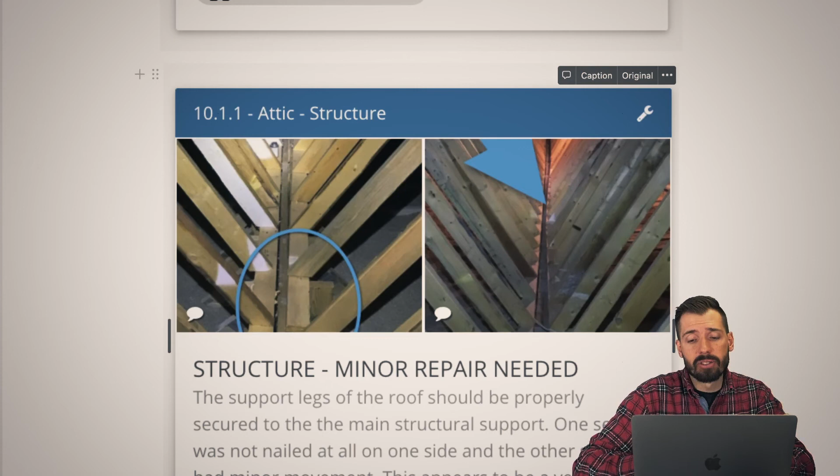So here we go, this is a better picture right here. What you're able to see, you can kind of see like 2 nails right down here, but basically, you can see the 3 nails on the left-hand side of the circle. You see how they put those 3 nails in just like that right there? That's exactly what we want to do on the other side into that vertical piece of wood, because right now instead of being on the piece of wood, it's like, not so much. So we just want it to be on that piece of wood so we can distribute loads appropriately.

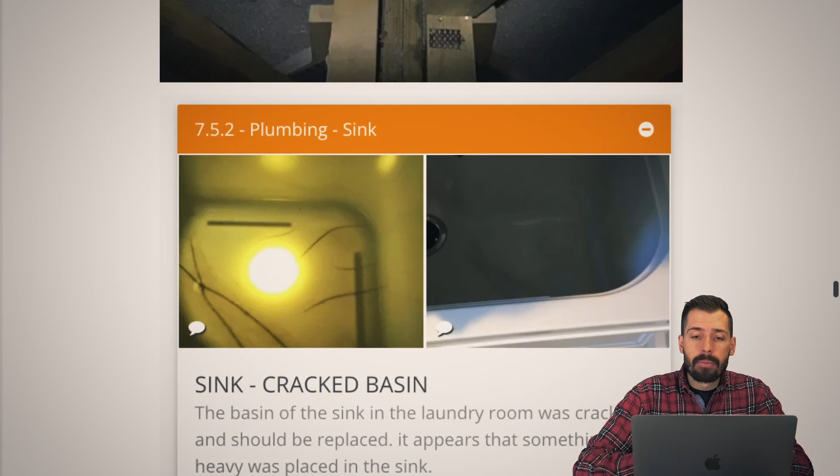Moving on, this sink here is one of those really inexpensive laundry vanities, for like $100, $125. It comes with the sink, the faucet, whatever, and a little door. But somebody had either dropped something or put something in, and you can really see it whenever I put the flashlight underneath, that we have all these cracks inside the basin of the sink. We just want to get that replaced. Not a big deal.

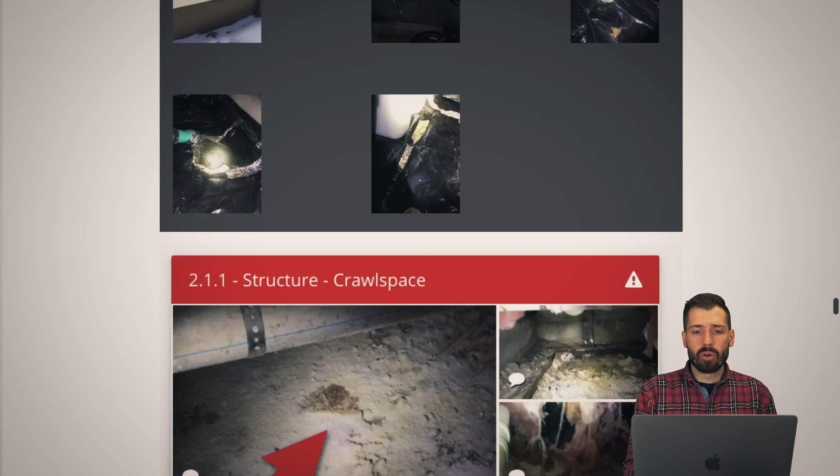This right here, radon system inadequate. So in order for a radon system to work, we need to dig a trench around the dirt foundation, put in a corrugated pipe that then goes to another pipe that goes to a fan. We then put plastic down over top of it, secure around the edges, and make it an airtight seal. As the fan comes on, it just sucks that up, creates an area of low pressure, and says, hey radon, let's go over here.

And we're going to go up this way, and the fan just shoots the radon right out. So that's great. And then, of course, we want the radon, like we said earlier, to go all the way up and away from the house. This radon is right at the base, and it doesn't go all the way up. It's literally right at the base underneath the kitchen window.

So we are going to get radon gas. If I open up the kitchen window and say, oh my gosh, it's a beautiful day, I want to breathe in the fresh air, well, I'm breathing in tasteless, colorless, radioactive gas coming from my radon system. And that's not good for doing dishes. It's just going to make you have a bad time.

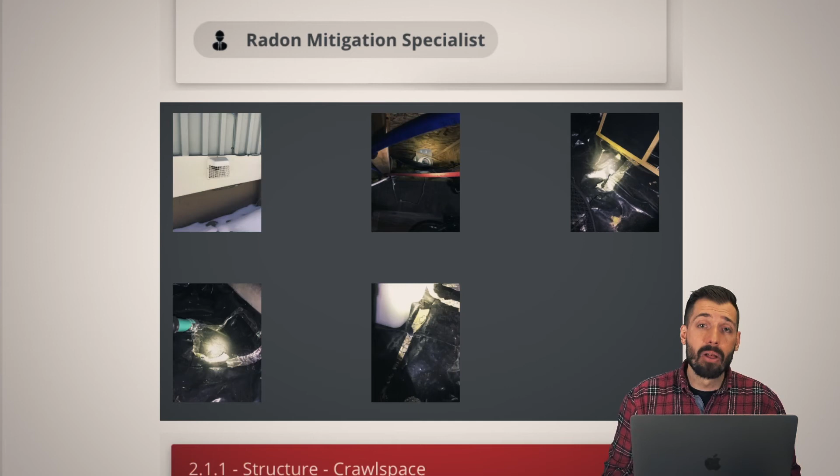So we want all of the plastic to be properly sealed. We want to make sure there is actually something around the perimeter to create that area of low pressure. We want to make sure there's an exhaust pipe going out, and we want to make sure that exhaust pipe goes all the way up and out, past the roof, so that we aren't getting radon coming back in.

This crawl space, I was only here to do a sewer scope, but whenever I was doing the sewer scope, it's just, how can you not know that the whole ground is saturated and that water is actively dripping into the crawl space from the foundation wall, which is not ideal. There's insulation falling, mold growing, other funguses growing, and you can actively see water dripping off the wall coming in. So I was only here to do the sewer scope inspection, which did marginally okay.

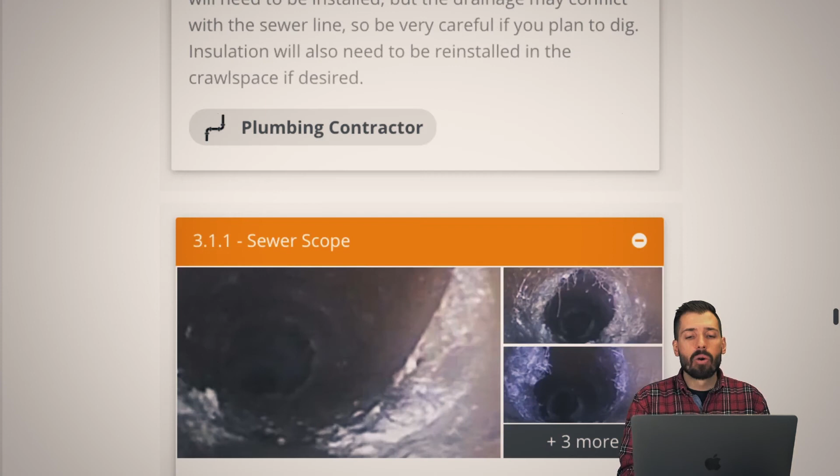A lot of clay pipes, and I don't know if I have— hey, there it is. So lots of clay pipes and lots of roots coming in from the clay pipes.

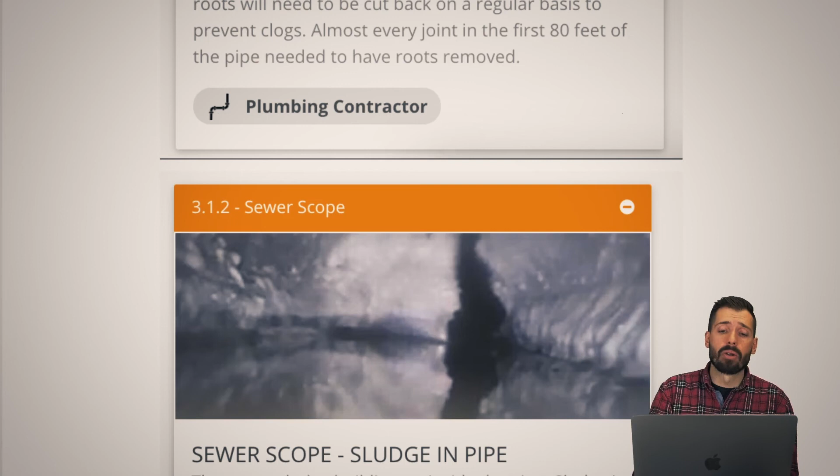And then also some areas where we have a bunch of sludge buildup, we just want to knock that sludge out, have somebody come out and rotary clean those clay pipes, because this house is old, really, really old. So just a few things to think about.

This house here, if you can put the word structure and do it myself together, you're doing something wrong. You shouldn't do it, 100%. So crawl space, support inadequate.

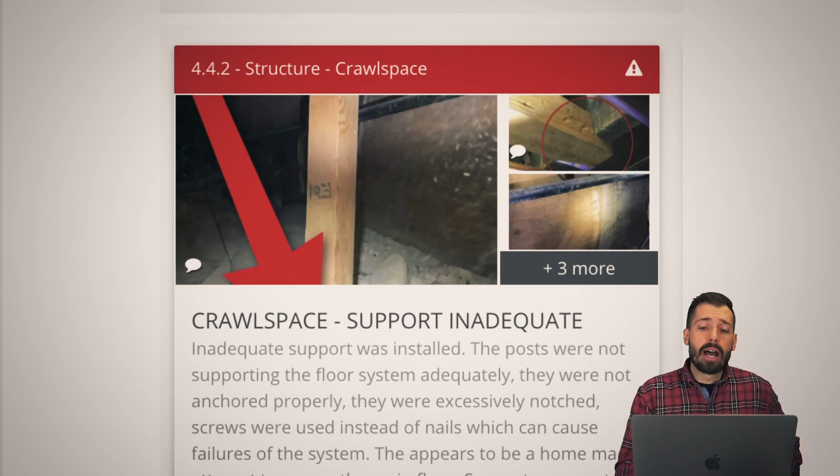Let me show you a couple of these photos here. First off, the strength of a 4x4 is reduced to a 1x4 when you cut out 3 inches. It's just that simple. Whenever you use screws, they are very likely to shear. If a screw shears, the whole thing comes down.

That's why you're supposed to use nails, because nails will bend and bend and bend, and before they break, they have bent so much that you're like, oh my gosh, look at this thing that's failing. Whereas everything can look perfect, 100% perfect, and then it just shears with a screw. So don't use drywall screws for structural purposes. Just an idea, just throwing it out. I'm just a guy who reports things.

The next thing is, not only do we need to be properly anchored to the support post above, but we need to be anchored to the ground. This ground, I don't know if you can see it in the picture, is sloped. And then they put down a piece of 2x12, and then they put this piece of wood in, and I think they just hammered on it till it fit.

There needs to be a concrete footing. The depth of the concrete footing, the size of the concrete footing, all needs to be determined by a structural engineer. You then, based off their recommendation, need to put a 4x4? Probably not. Realistically, a 6x6 or an 8x8 to be able to support that weight.

And then how did you jack up the floor already to be able to put that in to then have it rest at the right height? Who did the measurements to make sure the floor is the way that it's supposed to be? There's just a lot of things that are wrong here.

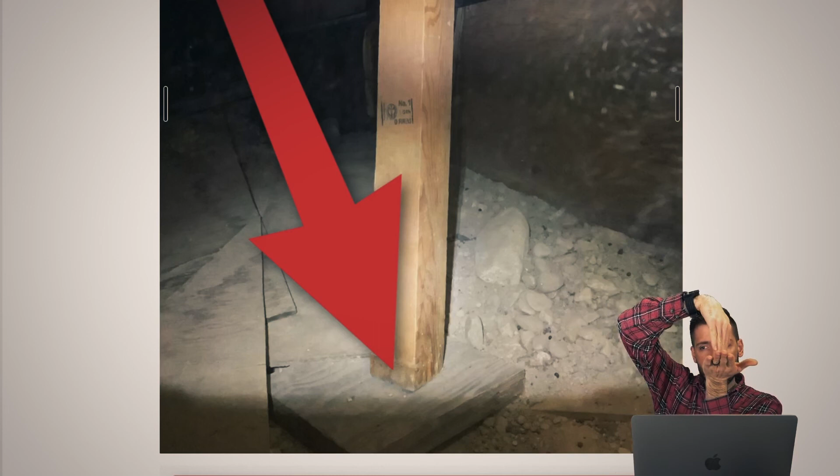If I were to bump into this, the whole base of it could just slide right out. And if it slides right out, will the structure collapse? I don't know. Will the structure sag? Yes.

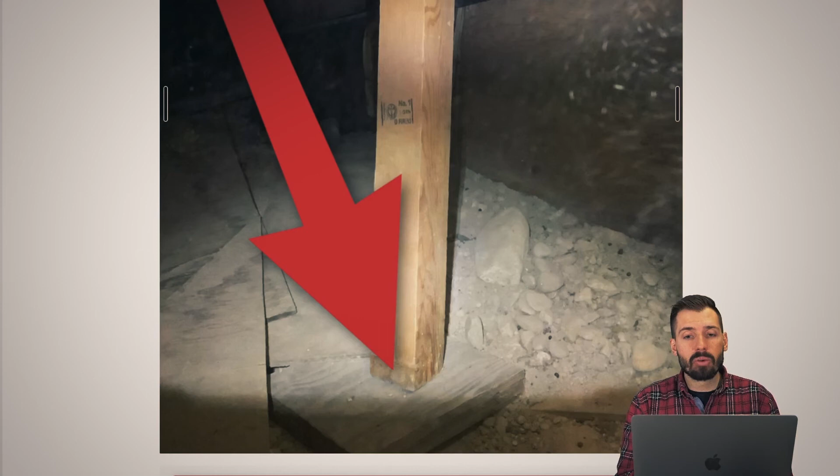So it's just one of those things that if you can put the words 'I'm going to do a structural improvement to my house and I'm going to do it myself' - if you can say that sentence, just stop right there. Just stop. Whatever the issue is, I guarantee you there's more than just one solution. Whenever you think about things, they are in tension and they are in compression.

And if you were to take a look, perfect, I have my marker. Let's do this real quick. If I have my marker right here and I am putting pressure on it and trying to bend this marker this way, you can see it with my hands. And what you're seeing is, when my hands do this - I'm looking at my screen over here just to make sure you can see it.

When I do this, you can see that this is expanding and this is contracting. So as I do this, this is going to be under compression and this here is going to be under tension. Whenever I place a piece of wood as a structural member, I have just changed the dynamics of the way that the house was designed for what should be under compression and what should be under tension.

And without going through and seeing where all the joints for all of the beams, the girders, and how those overlap and how those have been mated - and maybe if we have floor joists that have been sistered in a certain way - whenever I do this, I take away all of the intended tension and compression that was inherent to the design of this house. I just don't like it. And that's why it's red.

So next thing, window egress inadequate. So this particular window, I'm a skinnier guy, and I can't fit through these windows and escape this bedroom. Not only that, they are way too high off of the ground.

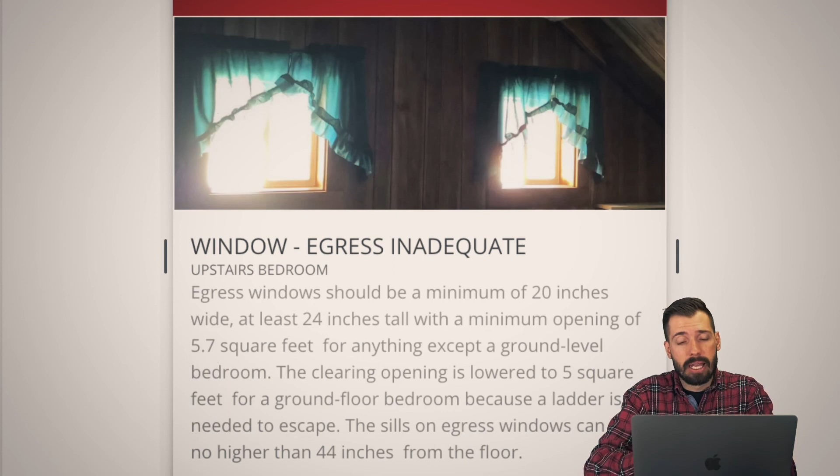But the reality is that you just can't. And so with this being a bedroom, you really need to have a way to get out, and right now they don't have that. So again, that's why that's red, because it could definitely hurt somebody.

All right, electrical wiring. This one is fun. So the best thing that I could find was basically 1920 is about whenever that light switch was invented. So 1920, that's pretty old. And so let's just say 1920s, but everything is knob and tube.

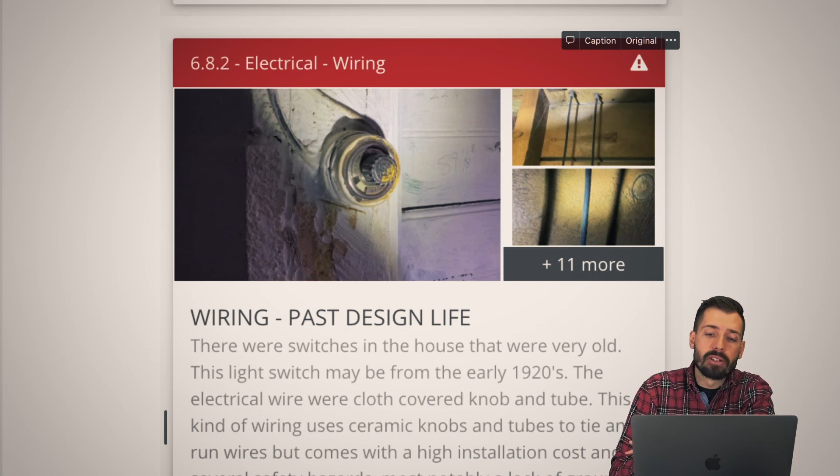You don't really want a house with knob and tube. You want to make sure that our wires are not cloth coated. We want a different kind of coating.

But here is a picture of that light switch. Now, the interesting thing is you can't quite see it because it's a little bit off, believe it or not, after 100 years of use. The light switch still operates, and that white section normally says on, and then the black section is black with white text and says off. It does work, it just doesn't always fall into the proper position so you can actually read it. But man, that was an advancement, to see something tell you on or off so you know if the circuit is connected or disconnected.

But the issues that we have with this, so here's an example of knob and tube. So these are tubes right here, just ceramic tubes that the wire goes through. And each one of these wires, one is hot, one is not. I think the one on the left is the hot, and the one that is not is on the right. They are cloth sheathed, and that can be broken down. Rodents can eat it, you know, a million different things.

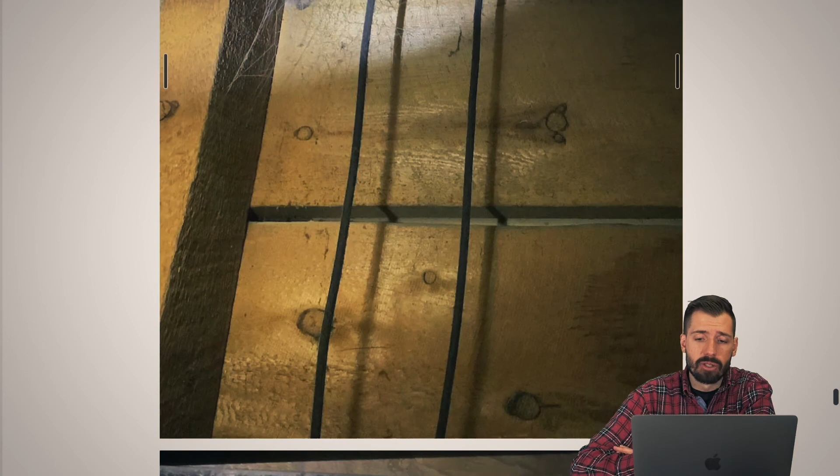Here are a few of the issues. Also in the crawl space, here we go, knob and tube, getting over to a light bulb. And the breaker, so old. After 40 years, you need to replace your breaker anyway. I don't know how old this breaker is, I did not take it off. It's made by General Electric, and General Electric has done a good job, so I don't think that's necessarily an issue.

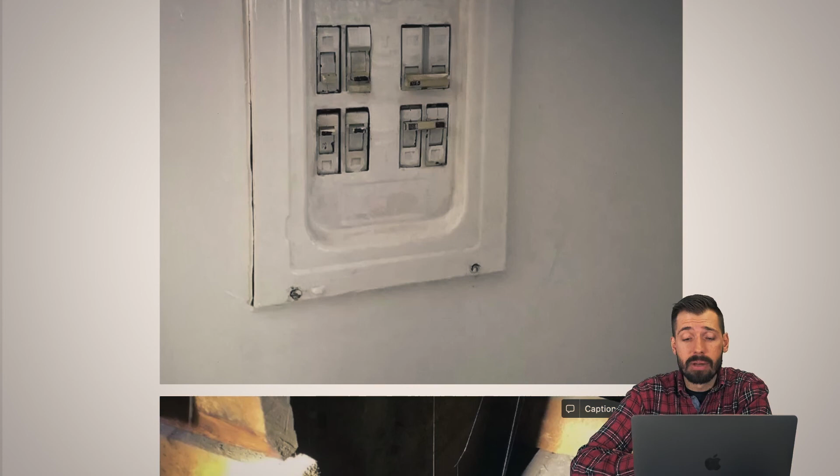But here's where the real issue is. There are splices that are not to modern standards, which can create arcing where electricity jumps from one connector to the next. If there's arcing, then there's heat. If there's heat, then there's fire. We saw that triangle, don't even get me started with a tetrahedron, but we saw that triangle. And so with that being said, this is just a fire risk waiting to happen.

In addition to that, every single outlet, and I don't know if I have a picture, I do not, but every single outlet is just a two-prong. So we have a hot and a neutral, but I don't have a ground. There's no hot, neutral, and ground. And what that means is that I cannot properly protect metal appliances and other things like that.

So I would need to run a ground. If I run the ground, then the metal, let's say like a washing machine, which uses a standard 120 plug, that ground is going to be connected directly to the chassis. And so now the chassis, if something were to happen from moving parts or whatever, if an electrical wire were to touch the metal frame of that washing machine, then that electricity is going to go through the metal frame and right out that grounding wire. And whenever it goes out that grounding wire, then we're safe. If we don't have that grounding wire and you touch that washing machine, lights out, you're done.

So we really want to update things. Now, what you can do is put a GFCI on there, and the GFCI will have 3 prongs. Now, I won't be able to test the GFCI because in order to test it, I need to be able to ground it, so I can take the electricity, and instead of allowing it to do a circle between the hot and neutral, I create a circle or path between the hot and ground, and then the neutral's like, hey, you left me out. And that turns off the GFCI, which is a ground fault circuit interrupter. So basically, you can put a GFCI onto these outlets to update them and make them safer. The reality, though, is that you do not have a ground.

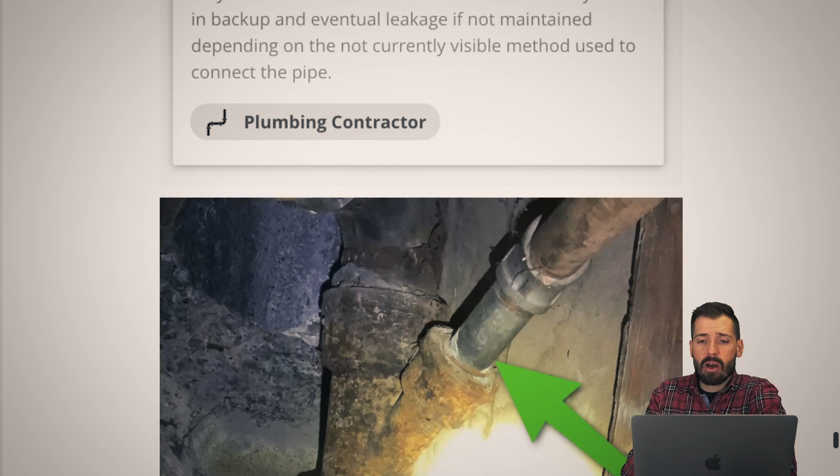All right, this is a little unconventional. Normally what you would do is, you see how right here we have a Y coming into this, and I labeled that as green. Is it perfect? No, it's not perfect. It's super old, but it's good enough. It's better than what was done down here.

Down here, they actually bored a hole into the cast iron and came in that way. Now, if I bore a hole and my pipe comes in, how deep does my pipe come in? As stuff comes down, is it hitting the top of that pipe? If this is a cross section right here, and I put that pipe in, is it this far and I'm only getting a little bit of junk? Is it this far and I'm getting a whole bunch of junk? Or is it almost the entire way and I'm creating my very own blockage in here? In addition, it's just not ideal, and there was no reason the plumbing had to go down this far. It could have been connected into the Y above, but they decided to do it this way, or at least it looked like it could have been. So just things to be mindful of. Is it working? Yeah, it's working, but it could have been done better.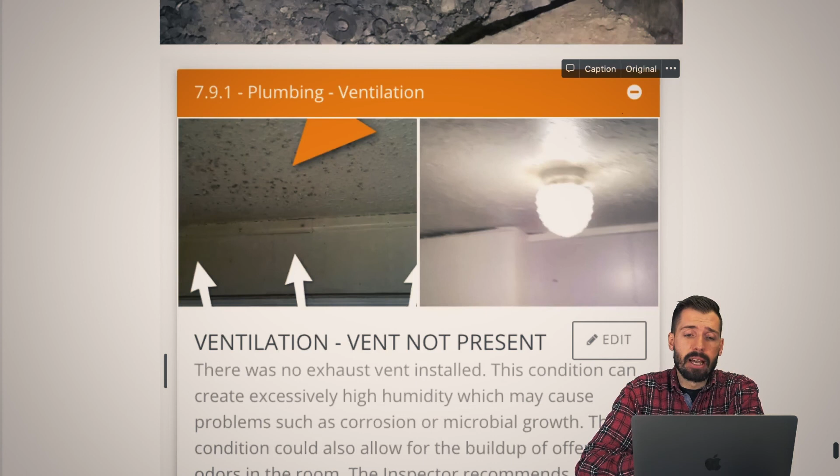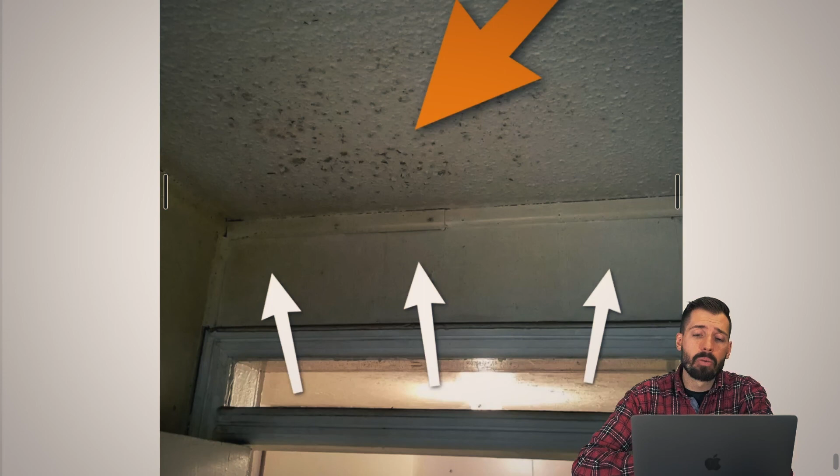Here's another interesting thing. You really need to make sure you have ventilation inside your shower, bathroom, whatever area, anytime there's hot, humid air. So what happened is they have this section cut out, and that air coming in exits, so that hot, humid air exits the bathroom, and then it's touching the cold ceiling, because the cold ceiling is not as warm as inside the bathroom. It touches the cold ceiling, then you get mold, mildew, any other kind of microbial or fungal growth. So just put a fan in, and then you're taken care of. But in this particular case, the bathroom is warmer than the hallway, and as soon as that hot, humid air touches that cold ceiling, it condensates. And the mold says, oh my gosh, thank you for that wonderful lunch. Then they start growing and reproducing and releasing spores, and that's whenever you have allergies to mold and other things like that. So put a layer of kilz on this, which stops that microbial growth, and get yourself a ceiling fan, and you're good to go.

All right, right here, you want to make sure all your pipes are supported. All of these pipes, the support failed. We want to put in support that can actually handle the heat, because these pipes are used for heating the house, so they're getting really, really hot. I think that is degrading the ability for this particular polymer, this plastic, to stay strong. So we want to get that replaced if at all possible.

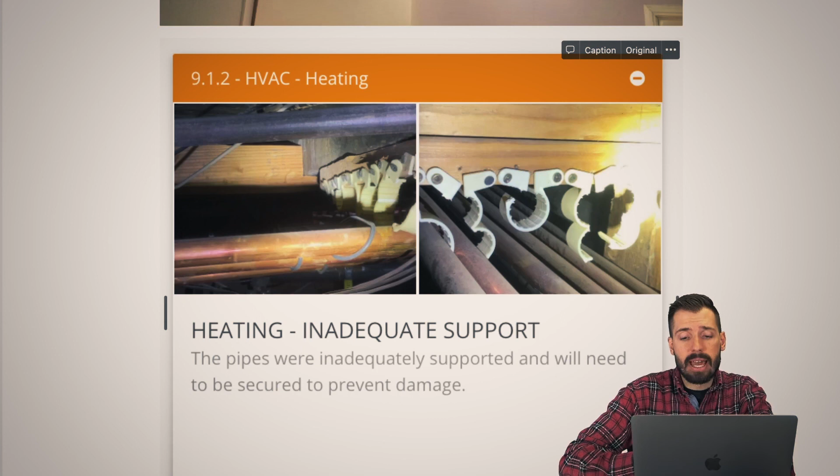All right, this is the largest dust bunny I have ever seen in my entire life. The largest dust bunny ever.

So long story short, this is some kind of mutant variant, something. Get a vacuum cleaner, get it gone. You don't need to have dust. Dust mites can live in something this large, and definitely allergies for children. Go through whenever you get a house, find all the nooks and crannies, get a vacuum cleaner, suck it all up. There's no reason to have this much dust this close to a bedroom.

So next one, whenever there's trash at a home inspection, we always put in that there's a bunch of trash on the exterior. The reason why is because it doesn't come cheap or for free to fill up a trailer and take it over to the landfill and dump it off. That costs money, that takes time, that takes effort. Who knows if there's any biological hazards that are in there? Who knows if there's a raccoon with babies that's going to be really, really upset with you for taking away their home?

We want this trash gone. We want it to be a part of your negotiation phase whenever you say, hey, you will get all of this trash off of the property, or you will pay for somebody to get all this trash off of the property, but the trash needs to be gone. Talk to your realtor. You do not want to have somebody else's trash.

Even me, I had no clue that there was all this trash in my crawl space after my home inspection, this was 6 years ago before I started the business. And I was very upset to find out that it took a massive dump trailer, took 3 loads to the landfill, costing hundreds of dollars to get rid of all of this junk that was in this crawl space whenever I bought this house. Because you walk through the house as a home buyer thinking, I am paying to have an inspection done. And then you go into the crawl space and you see that it is the whole length of the house just filled with trash. And it takes you almost a week just to get all the stuff out.

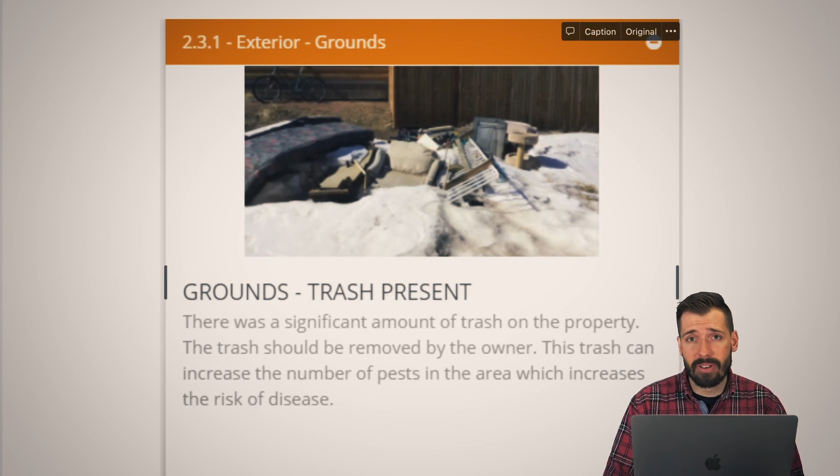So for me, I've made sure that all of my home inspectors don't allow this to happen to their customers. If there is an excessive amount of trash or personal items, we say, get it gone. We put it in here. We let people know because not knowing really hurts whenever you find out, and then you have a whole project ahead of you to get things done.

So next thing, crawl space freezing pipes. If you're putting heaters in your crawl space, that's super inefficient, but it also tells me that you've had freezing pipe issues before, and you better have disclosed that we've had frozen pipes before. Because if we see a union that was put together where clearly a pipe broke, or we see water damage or other things like that, we're going to call it out for sure.

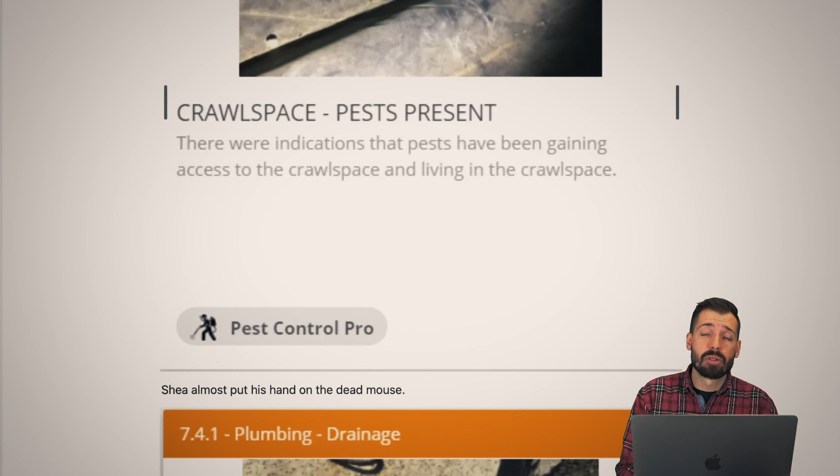Poor Shea, this is one from Shea. He almost put his hand in a dead mouse. Enough with the dead pictures. But Shea almost put his hand on this dead mouse as he was doing the crawl space thing. Just gives me the heebie-jeebies. I don't like it, not one bit.

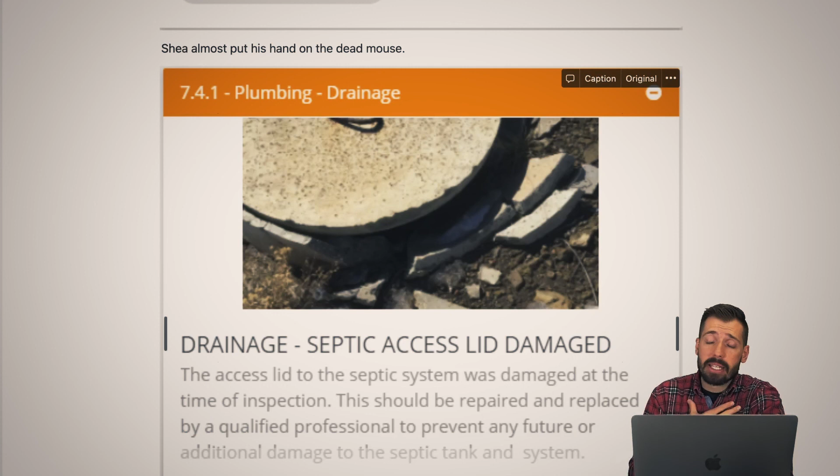All right, so if your septic system is cracked because it was hit by a snowplow, you can pretty much guess that it's going to need replaced. I mean, if just the top is cracked, how deep did that crack go? Are we seeping sewage? Somebody needs to take a look at this. We do not do septic, that is not our thing, but a septic inspector needs to come out and they need to verify if that is good to go.

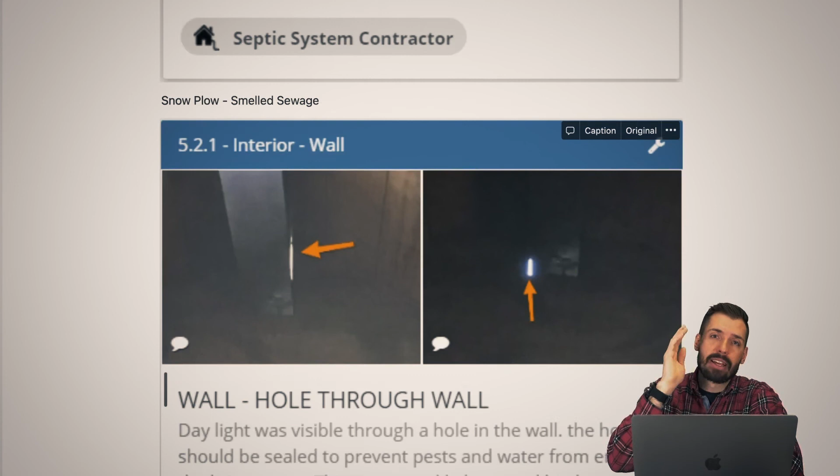This house was a gorgeous multi-million-dollar house, but up in the rafters, like up in the vaulted ceiling, they had a main beam, and that beam comes in at 20% moisture, shrinks down to 4% moisture, and now we have gaps on either side of that beam. We just want some kind of sealant or caulking, whatever it may be, to make sure that we aren't getting any kind of hornets, wasps, or other insects coming into the house, and also just from a heating standpoint to make sure we aren't losing any kind of air.

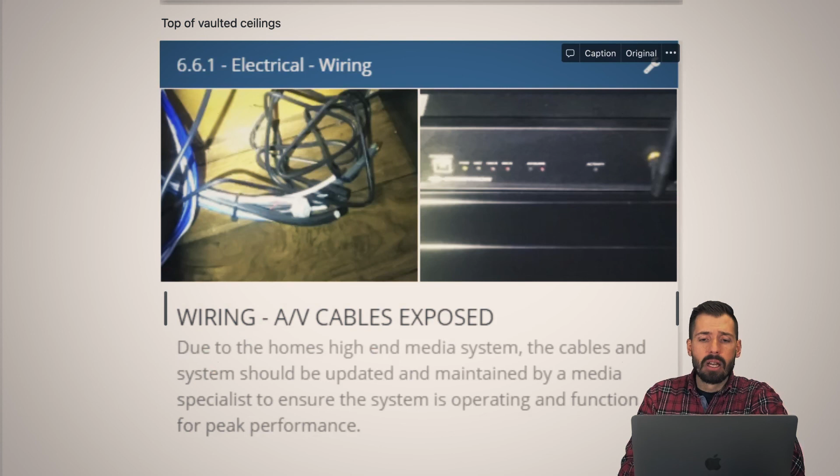Now this AV wiring and cables. So basically with these cables, there are a lot of cables that we make sure are not energized, but we don't test electronics, it's just too complex. This home actually had a Crestron product, which you pay a lot of money to have somebody get an iPad, put on your family's pictures, this, that, the other, have all this automation that if you press buttons, the blinds come down, the TV turns on, this happens, the fireplace lights, like all this automation.

We don't test that, that's not for us to do. But whenever we have cables that have been cut or this or that, basically you need somebody to be able to trace those wires back and say, okay, this Ethernet cable is plugged into the switch, it's port blah blah blah. This coax cable is connected, not connected. We have speaker cables that go to this room or that room. We need to set up these zones in this particular way. There's a lot of work to be done with that.

Just because you have a multi-million-dollar house does not mean you're exempt from issues. There are so many issues in multi-million-dollar houses to be aware of. Do I think somebody watching this is buying a multi-million-dollar house? No, not at all, but I'm going to put it out there because this is used for my inspectors to go back and review things. And if you on YouTube enjoy watching this, more power to you, I love it. But multi-million-dollar houses, you're not safe, there's always going to be some sort of issue.

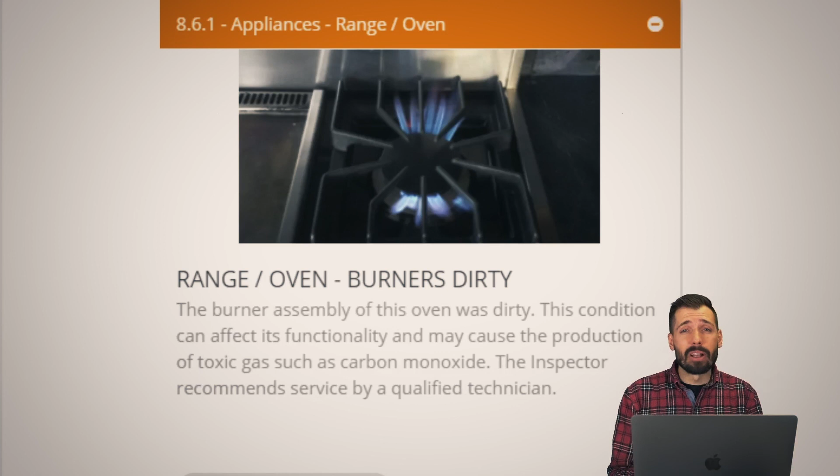Let's take the $16,000 range for instance. This range is a $16,000 range, and because it was not well cared for, this is what the flames look like. Huge, just shooting out on either end and nothing around the sides. You have to take a pin and break off all the carbon deposits in every single one of probably the 80 holes on just that one burner. And you have, I think, 1, 2, 3, 4, 5, 6, 7, 8, at least 8 burners plus the griddle. So that's a lot of work just to get it back up and running to the way it was supposed to be.

Carpet needs to be restretched. That's an easy one. Have a carpet guy come out, stretch it, cut it, make it work, make it look beautiful. The carpet does not need to be replaced, but stretching carpet sometimes can be cumbersome, so we highly recommend having somebody professionally do that.

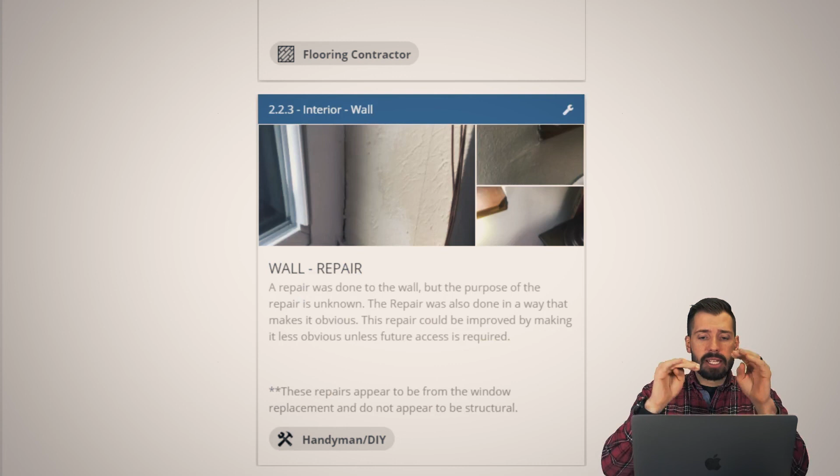This one here, wall repair. Again, difference of materials, things settling, things cracking. I think that it's bad drywalling in general. It could be something more, but in general terms, I think that's just bad drywall.

Whenever you have bad drywalling, drywallers will basically put a little bit of mud, put some tape, put a little bit of mud, and then they'll be like, oh, that's good enough. This should be a multi-day process where you let the mud dry to a certain amount, and then you put on a thicker amount of mud.

Whenever you see the tape like this and you see the cracking on that seam where that tape is, that's because they did not put a thick enough amount of mud onto there. A lot of times you want to put that nice thick amount of mud on there, and then come back and put on another thicker layer. So if this is your tape here, you tape over the first one, let it dry, and then tape longer on the second, and that way it looks better, the tape is secure, everything is good, it'll reduce cracking. Just one of those things.

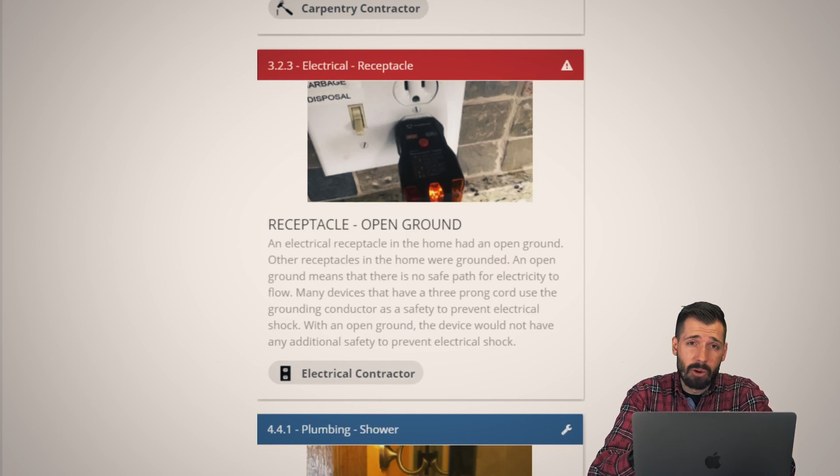Same thing here. You have open ground in a kitchen? What? No, we don't want to have an open ground in the kitchen. We want to be GFCI protected and we want to have a ground.

This one right here, this is what we're going to end on: if you want to put your hook for your towel, don't put it somewhere where your glass door can smack into it. If that glass door smacks into it, you're out of luck. That glass door is going to shatter and you're barefoot. It's just not a good thing to have happen.

I guess if the glass door shatters, you could probably then just grab your towel because it's hidden behind the door anyway, which is so uncomfortable. I don't understand - you open up the door, you can't get to your towel, you have to walk out and close the door. Now you're cold and dripping wet, and now you can grab your towel? Come on, we can do better than that.

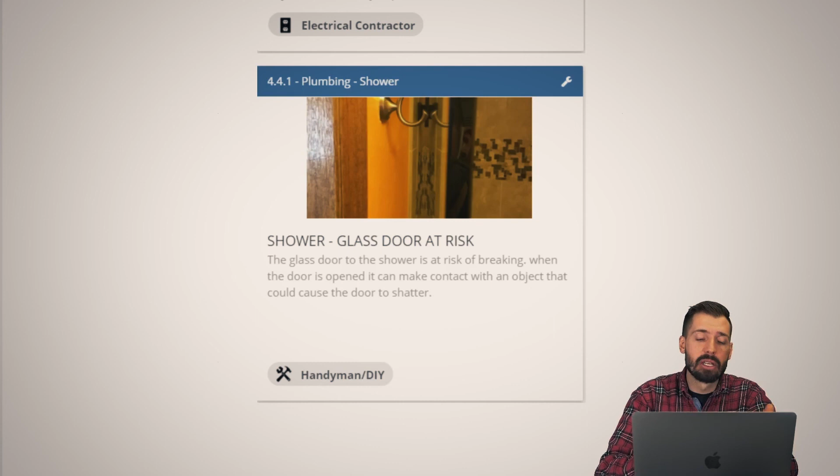I just want to say thank you for watching the February 2021 in-service training. I think this is a good resource for our inspectors, but if you geek out on this stuff like I do, sometimes it's just fun to see some of the mistakes that are made in different houses and how you can come about to avoid such things.

I'm very, very excited that in March we're going to be using the new template. We're going to be using those new iPads to do all of the inspection items in the home, and basically have a report that's 90% done, ready for you to view the moment that we leave the home inspection. I think that is going to be an absolute game changer, and we are so excited about being able to offer that to you guys.

In addition to that, with Shay and Jeremy and myself, we are already pretty well booked, and we aren't even in the busiest part of the season. So we're very excited for the opportunity to do more home inspections and bring on more inspectors and get more stuff done, because I really want to make sure that we are doing the best inspections that we possibly can. I have faith in my inspectors, our training, our in-service training, our continuing education through InterNACHI, and also our training that we do here with us. I really think that we are on the upper level of education and training, and that is very important to me as a business owner.